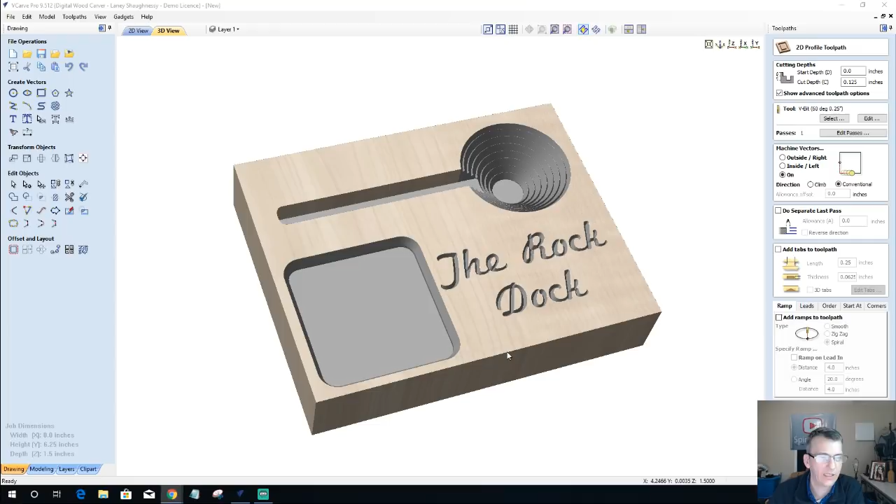So just wanted to give a little screen preview of the basic model. This is the basic model, right? We're gonna dress it up, change it around, make it bigger, do some cool stuff with it. But this will be the basic concept. Our cell phone or tablet, whatever we end up doing, will rest in here, and the speaker of the phone will face the passive speaker here, and the sound will be amplified through this cone, increasing the volume. Depending on the cone's pitch and the carve itself, the ridges in here I think will not hurt the sound quality coming out.

We can make it smooth. We're going to look at that as well, do a couple little step overs on our tool paths and things like that when we get into it. And what it's going to end up being, because I've never made one, I've not carved this yet - this is going to be whatever we end up with at the end of the class, a prototype. I'm going to carve it, test it, see how the sound and everything does, and then build from there.

I'll end up making a few different models of it. Some cell phones have speakers on the left, some on the right, some upside down, whatever the case may be. In my case, my speaker's on the top, so when this is docking, it would either have to sit upside down, or I'm going to create it to where it can sit on its side. So we'll kind of see how that goes.

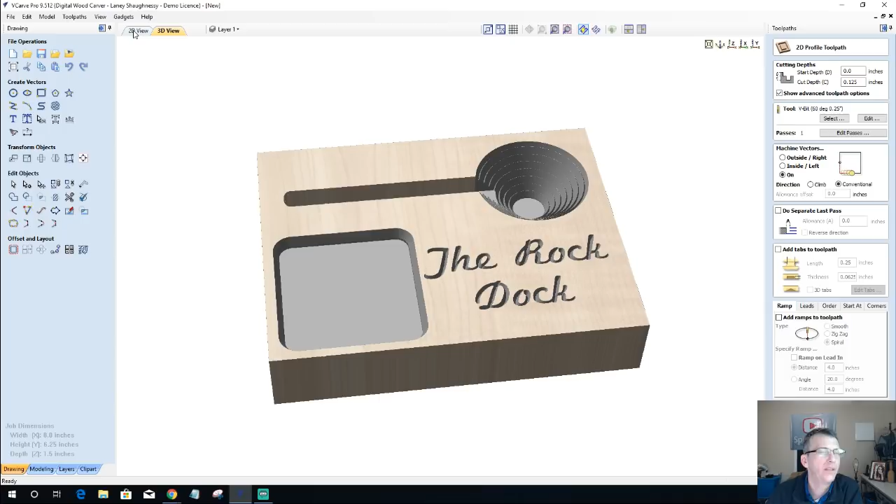We've got a rectangular vector here with some radius corners, and this I thought would be maybe like a little change station or a catch-all for keys for this little dock. Whatever the case may be, we can make it bigger, like a little wallet holder for a men's docking station, or a little jewelry holder for a women's, whatever. This is where your imagination can kind of run wild. So we've got a rectangle for that.

I got some text thrown in there just to fill in the void, but we're going to end up doing something different with that. We've got our slot here, a nice little rectangular slot with an arc at the end, where the phone will sit.

And this arc in this particular rendering is a half inch wide by a half inch deep. The half inch wide will allow my phone to sit in there well enough that it will hold it securely, but it will also give it a little bit of a tilt, so it leans back instead of sitting straight up and down - the phone will tilt back. We could make this wider if we wanted a little more tilt, whatever the case may be.

And then, of course, I have some offset circles that are carved at different depths to create the passive speaker. Now let's take this concept here and...

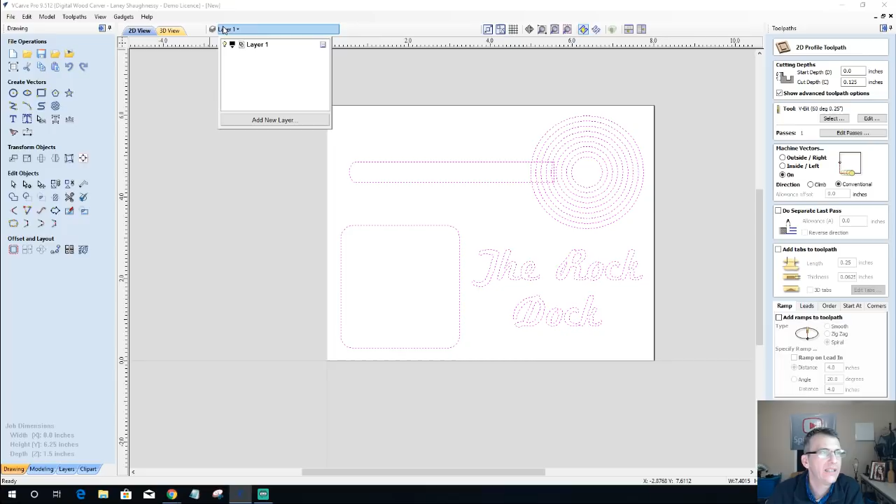We're going to leave that on layer 1, and I'm going to left click up here in layer 1 - or we can access our layers down here in the bottom in our tabs. But I'm going to go up here, it's a little easier.

I'll go back to my drawing tab, and I'm going to right click on layer 1 and rename it. I'll call this the original concept, because right now it's just a concept, a starting point, and then we can collaborate.

I'll ask you guys some questions, what you think. Imagine you were at your desk with your computer screens, keyboard and things in front of you. If this was an accessory sitting on your desk, a little slot maybe for a keyboard, what would you like to see? Maybe a little area for notepads, post-it notes, or a pen or pencil holder, what have you.

We're going to just really create something cool and see what we can come up with from there.

Now one of the things we've got to keep in mind, if we look at the project itself, notice how thick it is here. I've got this at, right now I think it's 1.5 inches. Let's take a look at the job setup. Yeah, 1.5 inches. That would be a little bit too much. For a little docking station, that would be a good height.

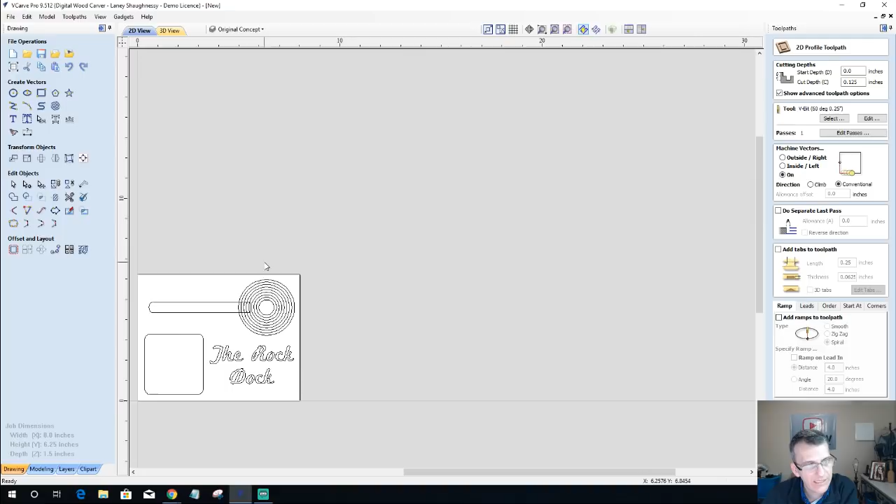For our little tablet station, we're going to end up tapering this board down a little bit so it has a bit of a ramp to it.

What we want to achieve is I'd like to be able to do this in either a 1-inch thick piece of material or 3/4 inch. The only thing I don't know is how well it will work if we try this passive speaker in a 3/4 inch piece of material, will there be enough of a cone or area to amplify the sound?

And that's why it's a concept right now. We're going to change up some things. Are these changes for the positive, or for the bad? Is it going to affect the sound if I'm working with thinner material and don't have enough of a cone for that sound to amplify out of?

All of that we're going to figure out as we go, and then ultimately end up making one of these and doing some tests. Through those tests we'll perfect the design, and when I get that nice sounding quality, when I throw my phone in there and it amplifies the sound ever so slightly, then from there I can apply that to other designs or concepts. I could start to customize it with company logos, or somebody's little league team, whatever the case may be.

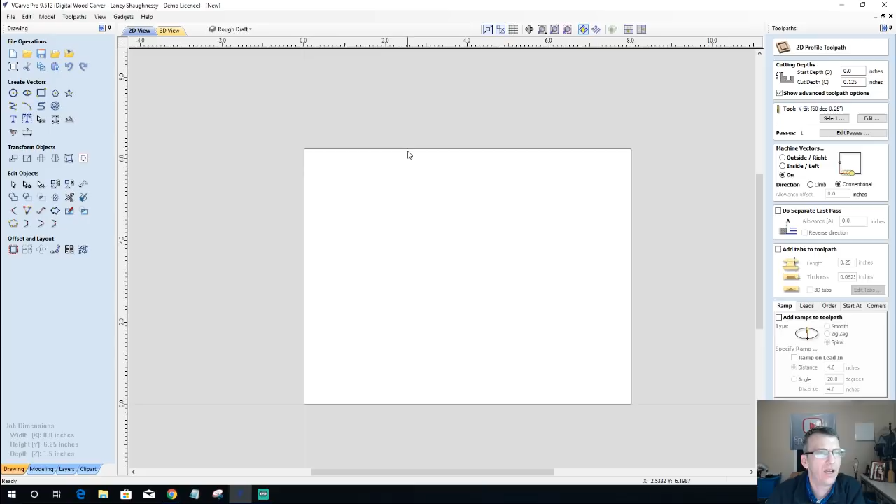Now what I'd like to do with this, for a small docking station, I've got this project - let's start from the beginning here. I've got it about 8 inches long by 6 1/4 inches wide by 1.5 inches thick.

Well, let's change it up, because I'm sitting here at my desk looking at the space, and I've got a mouse pad over to my right, a keyboard, my mouse and things. If I can incorporate some kind of docking station that would hold my mouse pad and all that stuff, that would be pretty cool. But that means my project is going to have to be wider - 8 inches ain't going to cut it. I wish I had a tape measure or some kind of ruler on hand.

Who has a desk without a ruler? What's up with that? If any of you are sitting at a desktop versus a laptop, do me a favor—if you have a tape measure handy, measure your keyboard and throw the measurement up in the chat, and we can modify to that.

For now, I'm going to go under the assumption that I'm working with about a 20-inch wide project, 18 to 20 inches. I think a keyboard isn't that big, but we're gonna go 20 inches and size it down from there. As far as the width, I'm gonna probably go a good...

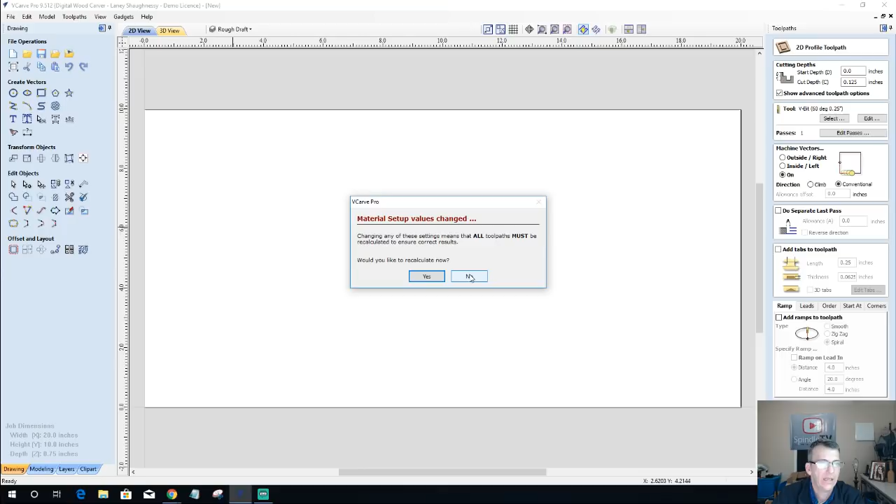This is where we customize things for different setups—we'll find a happy medium and get it in there. So let's get back to that 0.75 and click OK this time instead of cancel. I don't want to calculate those toolpaths I've created; I'm going to get rid of them in just a moment.

But let's look at what I was saying before I went into that little spiel. On my jig I have a wasteboard, and this is going to just be a small segment of the wasteboard. On the position of that wasteboard I have a set of boards positioned in—actually, let me back this one up.

Let me shrink this one up, and let's get these moved over into position so you guys can kind of get the concept.

All right, so I have a jig on my table that has fences on it that my corner of my board references up against, and keeps it square with the table. And then of course I have a series of holes running throughout the project where I have cams that, when positioned and then rotated, cam into the board to push pressure up against the fence.

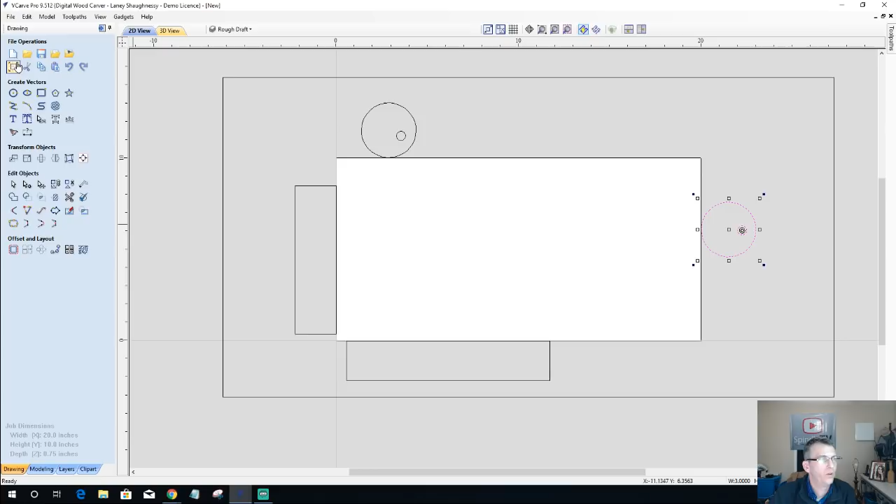So for me, that's why I reference off of my wasteboard in my job setup here, because I have this cam jig that I use. I don't want it ever cutting into it if I was cutting a part out. So by referencing my Z0 position off of the machine bed, or my wasteboard in this sense, I'll never really cut into it, only just graze across the top of it.

And the reason why I work with the XY datum in the bottom left corner is because I zero out my X and Y off of the corner using my DWC Quickset zeroing tool. And so that's why my settings are like this. Your settings may be different. You may be working off the top of the material, starting from the center, whatever the case may be. You're going to set your job up for your needs.

Okay, so let's get rid of this stuff. That was for illustration purposes.

And so Chuck has thrown out a couple of measurements. The big one is an old gaming keyboard with extra buttons on the left and the right, and the other one is just a normal, more common keyboard. So let's go with that more common 17.5 by 5.5 keyboard there. Let's kind of start there.

Let's go with, I'm going to draw a rectangle on the screen using the rectangle tool. And you'll find that if you're new with us, under the Create Vectors menu, we've got our shape tools, and the third icon top row is our draw rectangle tool.

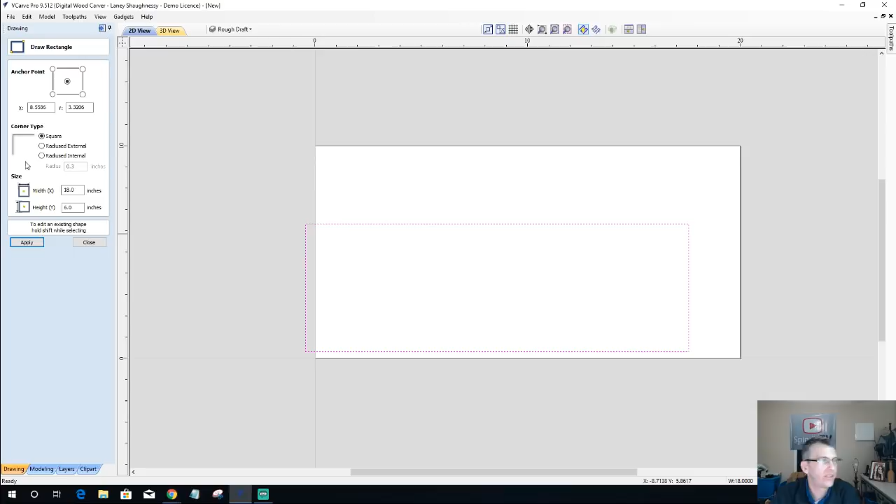And I'm going to go with some radius corners. I'll go with probably about a 0.3 on the radius corners there, just to give it a little bit of a nice corner look — a little more in the 1/4 inch radius, we'll go 0.3, and just to kind of smooth off those sharp corners and stuff.

Now if I double click on my vector that I just drew, it puts it in transform mode. And what transform mode is basically — when we're transforming an object, this is more so for the new guys and girls versus you guys and girls who have been with me each week — the transform objects menu, when we're transforming an object that we've created, we are moving it, sizing it, rotating it, mirror or copying it, distorting it, or aligning it in some way, whether we're aligning it to our material or another object. And in this case, I'm going to align it left and right on my board here.

Now what I'm probably going to end up doing is I'll probably make this a little bigger. I've got a decent sized desk here in front of me, and I've got two curved monitors that I'm looking at here, two curved screens, and I have no idea what their size are — I think they're 21 inches or something like that. But I've got a good little open area on my desk here that I could actually make a nice little caddy and kind of maybe get rid of some of this other miscellaneous junk that's on my desk.

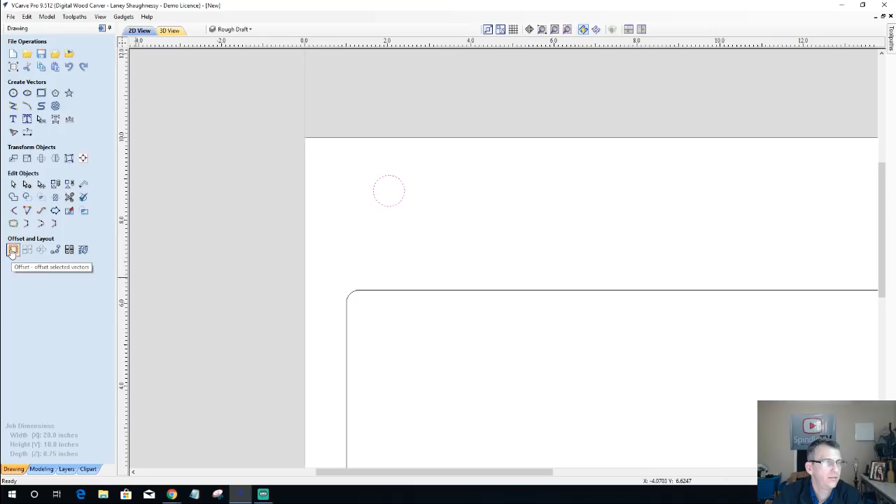So we're going to use the offset tool under offset and layout, it's the first icon, bottom row, and we're going to offset outward. On the spacing, I'm going to be using a 60-degree V-bit, 1/4 inch wide, 60-degree V-bit. I want a kind of narrow cone on the walls and everything.

If I wanted it to be a little bit wider, and again this is where the concept comes in, you know, I'll do some testing. If I did a 90-degree, then my walls would be even more angled. I'm going to start with the 60-degree and see how that goes, but I'm going to be doing some inside profile cuts.

So the spacing of these lines is going to be important. I am going to space them out a 1/16 of an inch. I want to select new, so every time I click offset, it's going to draw the new offset circle and select it, so I can just keep clicking my offset button to get the rings I want.

To create this speaker, I'd like to have it a really good size. Now, how many rings and how much my depth of cut is per ring is going to determine how many rings I need, if I'm not cutting through my material. I want to leave some material down in this pocket cut. Whatever depth I need to cut to get this to ramp up in a nice look will determine how many of these circles I need.

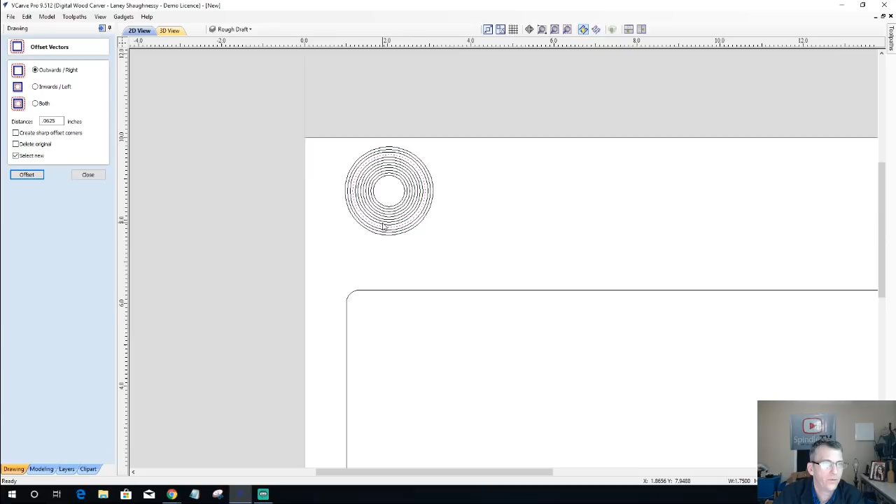So right now, from my original, I've got 1, 2, 3, 4, 5, 6, 7, 8, 9, I believe. Let's do this: 1 through 11. I've got 11, not counting my original, so probably a couple of those I won't need. Let's bring it down to 10, get rid of that last one.

Now, my cell phone is going to sit, because my speaker is on the top of the phone, I could either sit it upside down, but if I do that, my speaker is on the right side of the phone. If I have the screen facing me, then my slot would have to be over here. If this speaker was on the right side, that would be acceptable. I'm going to be turning the phone on its side, and that will put my speaker down in the bottom left corner, which will allow me to put my slot over here.

So I'm going to just draw a rectangle for now. This rectangle is going to be 1/2 inch in height, basically the width of it. And the cell phone slot itself, I'm going to go with 7.5 inches. Now my phone's smaller than that, but this will give me plenty of room to slide things in and all that stuff.

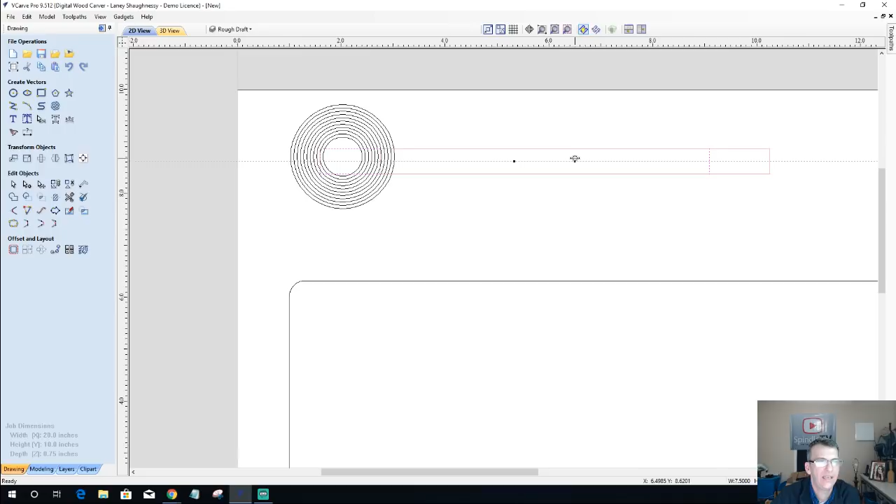And then I'll end up, I think on my tablet, I have like a 10.5 inch tablet, I may want to put a tablet in there. Who knows? You never know what this docking station could turn into.

We could make it a little wider and put our mouse pad over here. So what I want to do now is make sure this rectangle is centered up and down within the center of this circle. We're going to select the rectangle first, then select the circle last, and go into the alignment tools. The last item selected is going to be my selection, and I want that rectangle, the first item, to be centered up and down. So I'll click this third button under the center category and bring it up.

And here at the end, instead of these sharp corners, I'd like to go into node editing, the second icon under edit objects. On this line, this span — a span is a line between two nodes — I'm going to right click and change it from a line to an arc, let it bubble out like that, and that will be my slot.

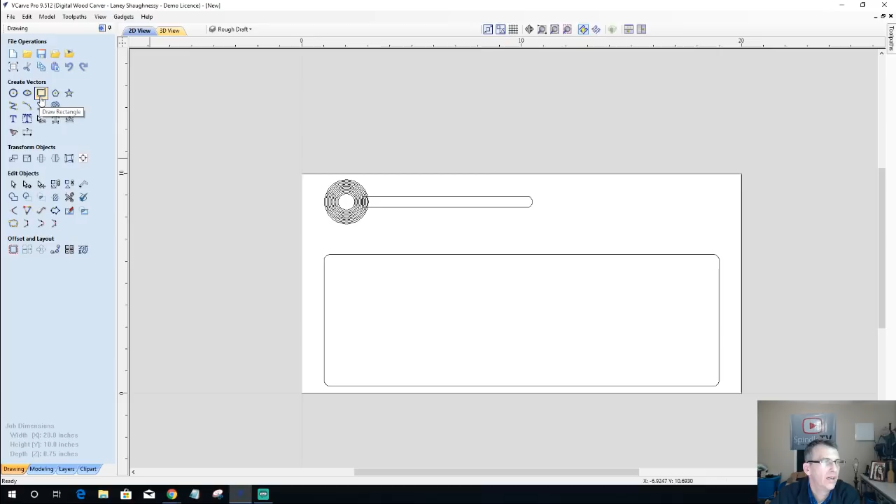Now, on my slot for my phone cord, I could just draw a basic rectangle there to give a little slot for the cord to go out, since it's right at the top of the keyboard. I might not even need it, but I want to give it a little bit of style, so we're going to make that cord kind of S-curve out a little bit.

So let's get rid of that rectangle. Actually, we'll leave the rectangle in there. I'm going to have it go past the line a bit, and go into node editing mode. I'm going to take this span and turn it into a Bezier curve by right clicking on it, and give myself a little curve here.

And then, while I'm in node editing, I'm going to right click on this and delete this span.

Okay, and on the span that's here, I'm going to separate it for a moment because I've got these two little legs right here. If I go back into node editing mode, I've got these two spans at the top and bottom. I'm going to right click on this bottom node and cut the vector there, and on this top corner, right click and cut the vector there too. What that's done is separated this.

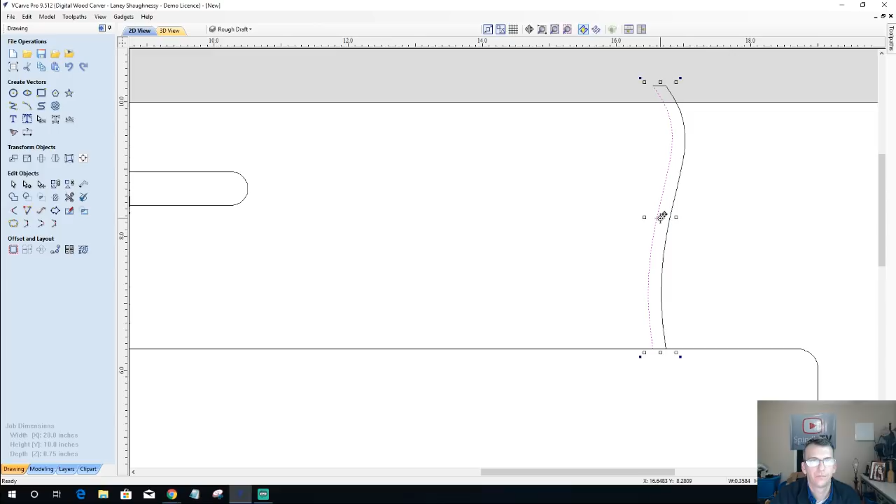My cable coming out of the computer is almost — I'm assuming it's probably about 1/8 of an inch or whatever the case may be. So on this distance here, I'd probably want it to be pretty tight, so when I press it down in there, it follows the path and kind of holds it there.

So let's do this a different way. I'm going to undo, Control Z, or you can use your undo button, to undo that drag, that copy I made. I'm going to right click and copy this, then right click and paste. Now if you use keyboard shortcuts, it's Control C for copy, Control V for paste, but I'm going to use the right click menu, and that's going to paste this line right on top of the line I'm copying.

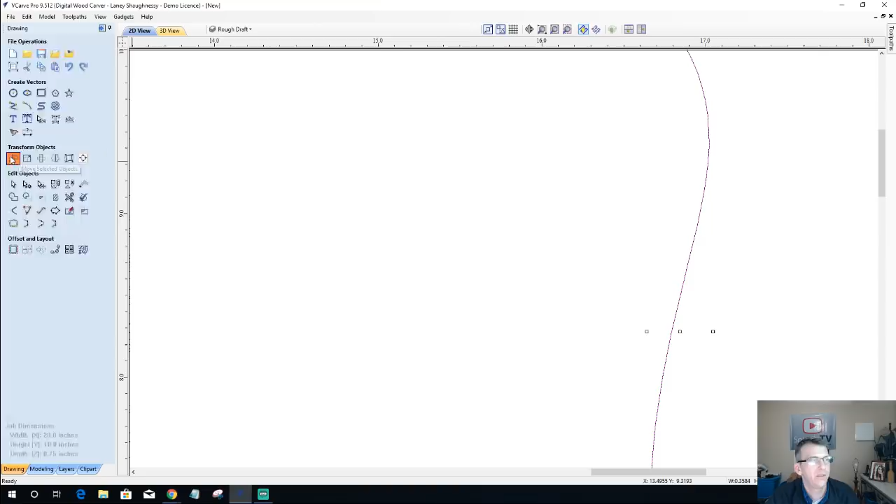And from there I'm going to use my move tool, the first icon under transform objects, and relatively move it along the x-axis a negative 0.125, an eighth of an inch over.

And from there, I'm going to use my scissor tools, making sure that trim vector selections are automatically joined when the form is closed. So I'm going to trim here to close off that end.

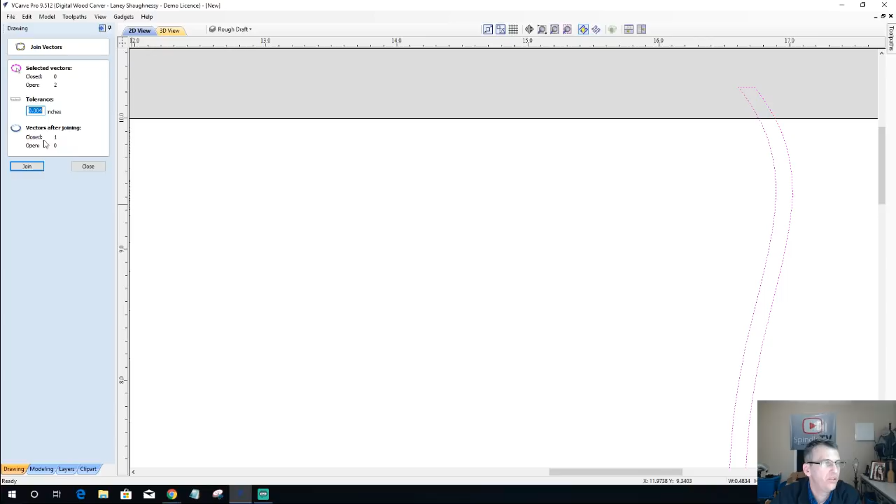And if I sneak down here, my other line is hidden by the line of the keyboard. I'm going to trim that away because it was on top, and that will close off my vector on this front side. Then I'm going to select this back line here and come over to my join tool, the first icon on the last row, and simply take those two vectors I've got and join them into one by clicking the join button.

This is going to be the vector for my pocket cut. Because all of this area within this rectangle is going to be pocketed out, I want to extend this vector a little bit beyond the line, so my router bit doesn't leave a little skin of wood where these two pockets meet. I want to overlap it so I get a nice clean cut. That'll be my little keyboard hole.

All right, so now what else can we put here? Let's put a little miscellaneous pocket here for paper clips, change, whatever the case may be.

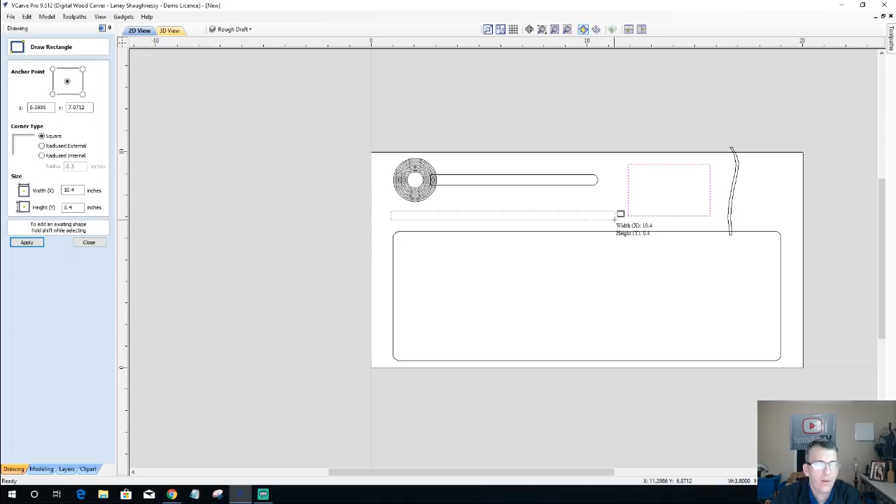And then with that rectangle tool again, I'm going to put in a couple of slots here for maybe a pen holder or pencil, whatever the case may be. Let's do two of them.

How wide is that? Let's look at our size tool and see. It's about a half inch. That's plenty wide, my goodness—pens aren't that fat, I don't think. We'll go with a straight half inch.

Don't want to get too close to my speaker now, so a single pen slot is fine. I'm not in school, I don't have pens and crayons and markers and all that, so a single pen slot will be fine. There, I'll probably end up with this one.

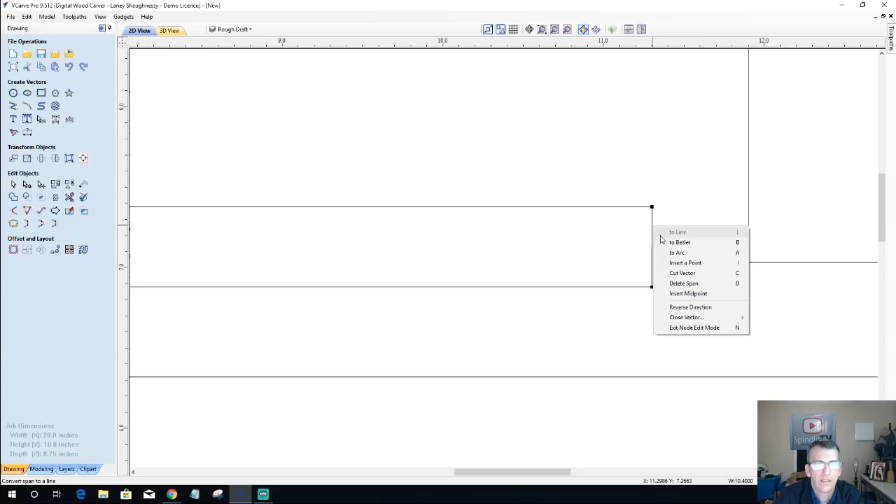Let's round off the ends. I'm going to go with node editing, and on this span here I'll put my mouse right on the line, right click, and change it to an arc. Same thing on this end—right click and change that to an arc.

Alright, now that I have that, let's get out of node editing by going back into our selection mode and shorten this up a little bit.

Clean that up. Alright, on this here I'm going to be doing a V-carve kind of angled walls. This pocket here, I'll most likely use a core box bit of sorts, so I have a nice little rounded bottom instead of a flat. This one will be just an end mill, cutting it out.

But because I want nice little organic shapes and smooth stuff, I'm gonna go back into my rectangle tool here, and give myself a little radius on those corners where that pocket's going to be.

All right, let's see here—Jeff threw out, put a hole through the board and put your slot on the underside. So Jeff, with the way my keyboard is configured, the wires at the top—Jeff is saying you can bend your wire down, put the slot on the bottom side, so it comes out of the bottom, and that way you don't have this slot cutting through the top, giving you more space over here to do something else with it.

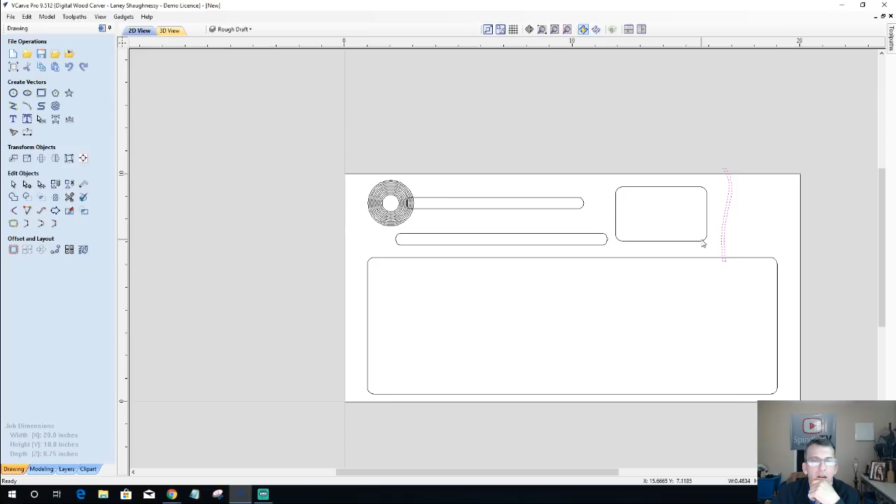With that then, I'm going to do that—then that gives me the opportunity to line up to that. Now if you notice what I just did, what did I just do? As I was moving, I wanted this rectangle to be in line with this one. So keeping my left mouse button held down as I'm dragging this out, I can wake up this vector, but just hover right over this, and it gives me this guideline here and allows me to snap my object to that guideline, ensuring that both of them are lined up.

Okay, so excellent. Now I'm going to leave this vector here for a minute. We'll most likely move it to the other side—I'll end up doing a couple things there, but we'll just leave this here for visualization.

But what we do need to do is, if that cable is going to come out of the keyboard, there's going to be a 90-degree bend somewhere going down. So let's go ahead and get a circle. I don't want it too close to the keyboard.

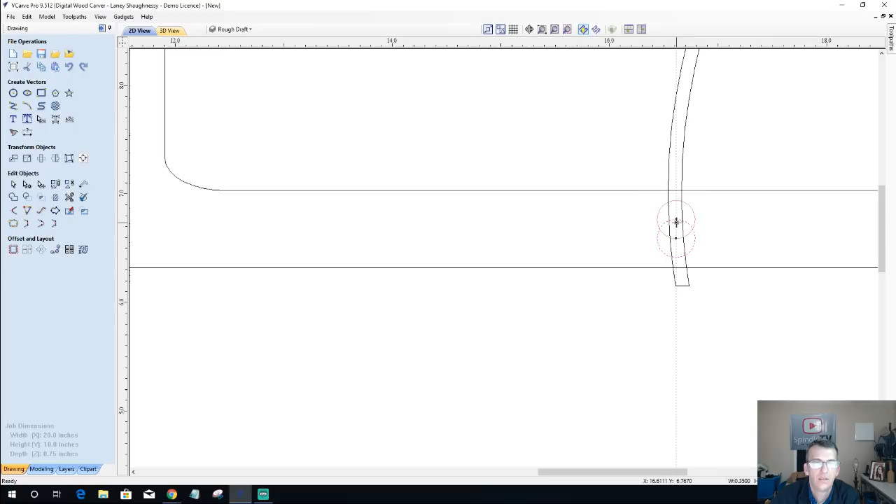I need flexibility of the cables, so it'll go right about here, since the cable comes right out of the top of my keyboard. We're going to make the size of this just a little over, because it's about an eighth of an inch. Let me get my circle tool and hold shift down to select that circle again so I can edit it. I don't want it to be a tight fit, and also I've got a USB slot at the end.

I've got a USB that plugs in at the end, so that means I'm going to have to cut a square slot in there for the USB to fit through, because I'm not cutting that end off the keyboard just to get it down in that hole. It's kind of throwing a little wrench in the plan. This isn't a wireless keyboard, so let's think about that for a moment.

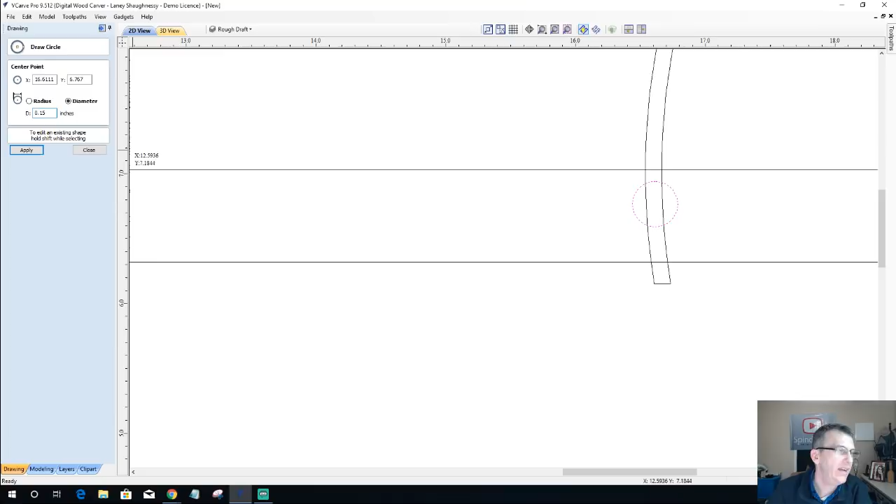If I do this and everything, I'll go 0.15 on the diameter of the hole, and then I'm going to have to get my USB plug-in in there, so I'll have to measure that. And I'll have to cut that little square in there, which won't be too bad. It wouldn't look too bad. We'll see — I may still go with the original concept of running across the top.

But let's center these two objects up to one another using the alignment tool and center. Under align to selection, I'm aligning them to one another. Whatever object I select first is what I want to align; whatever object I select last is what I want to align to. Then I click the center button.

Now I'm going to take both of these and select this shape last, and I should be able to— oh no, it's an S curve, so that's not going to work. So I'm just going to turn this vector off, use my left arrow key, and kind of eyeball it. Right about there. All right, so I have a little square with a circle in there.

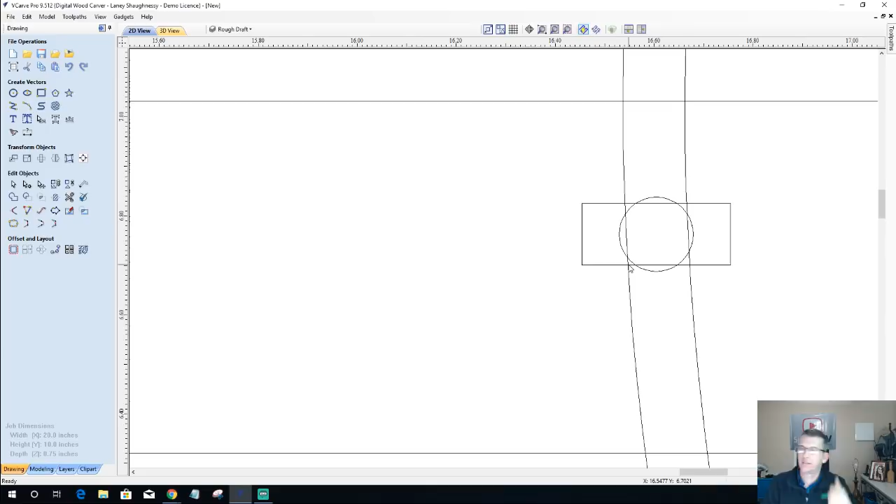Excellent. Man, I got a cramp in my arm. I'm not sure why — all this typing. All right, so I'll have to measure the little plug-in at the end of my keyboard and see where it goes from there.

But I use the full range of my mouse when moving around, and my mouse pad is big, so I wouldn't want to incorporate that into this too much, because this is going to be the desktop accessory versus the original concept, which is a little charging docking station for nightstands, dressers, whatever the case may be, you know what I mean. So this is just version number two.

All right, so with that, let's think about a couple of things. One is, do I want to have this taper down a bit? If I do, I'm going to have to figure out how to machine that to taper it down. If this were Aspire, I could just draw the model of that component and that angle, but I'm working in Pro, so I have to work around that.

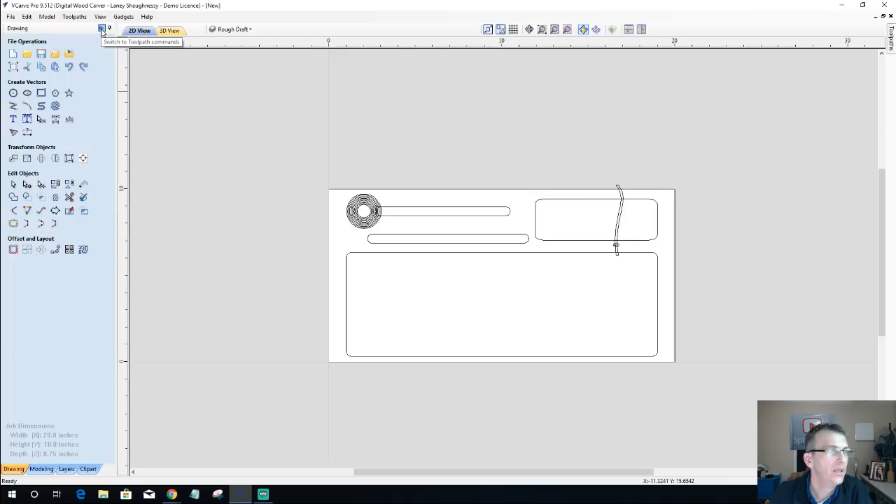For right now, let's go ahead and just create our toolpaths and see where we are and what we're looking like. So we're going to switch out of the drawing side for a moment over to the toolpath side. Now, these toolpaths here were for that original concept part. I don't want them to confuse you, so what I'm going to do is select all of them and delete them — get rid of them, because we're going to start from here.

I could have just kept adding and adding to this list, but then you'd be like, okay, which toolpath was what? I'll end up recreating them in a smaller project. I've changed my board size and all, so it's going to be a completely different project.

All right, so what do we got here? We got some pocket cuts and things. Let's start with this pocket here. I know what I want it to be. I want this pocket, I'll use the pocket toolpath, a 1/2 inch wide. I'm going to go 0.4 inches deep, and I'm going to be using a 1/8 inch end mill to cut that pocket. I could use a 1/4 inch since it's a 1/2 inch wide. Let's do that for machining purposes and time. We'll use a 1/4 inch router bit, and with it selected, we'll calculate that toolpath and get that pocket cut.

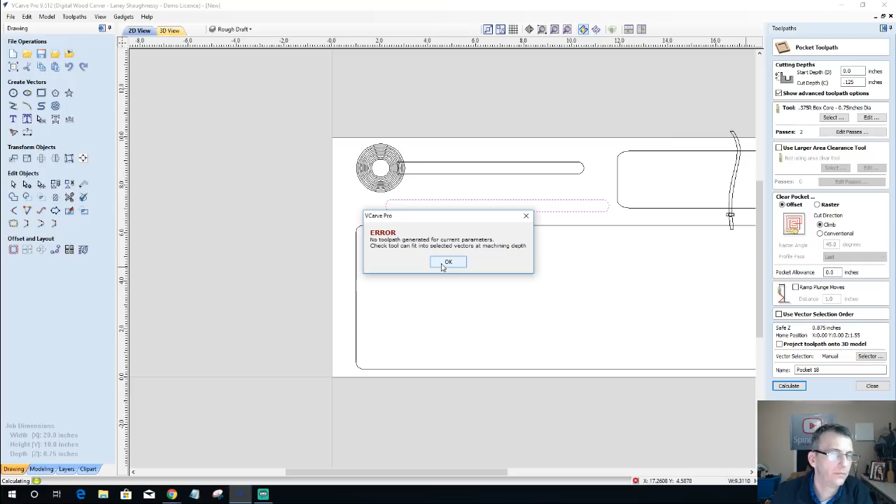Oh, actually, I'm an idiot. I don't need a pocket cut. Who's the goofball there, guys and girls? Laney is. I am going to draw a line from here to here across the center of this. It's a box core bit, so I'm just going to use that line and do a profile toolpath 1/8 of an inch deep with my round box core bit.

Okay. I want to be on the line. I want it to cut right on that line and everything. So let's go ahead and calculate that toolpath. Okay, that'll be my little pen holder area.

All right, now over here, there's going to be 2 toolpaths for this. One is a pocket, and the other is going to be a profile. Let's start with that first. And I do have this extended over, thinking that I am going to go underneath and bring the cable out the bottom side. If I was doing it off the top side the way we originally had it, I would not have the cable running through this thing. I would shorten this area up to some kind of little catch-all. But we'll make that wider, and we're going to use this, and then we'll figure out this part in a moment.

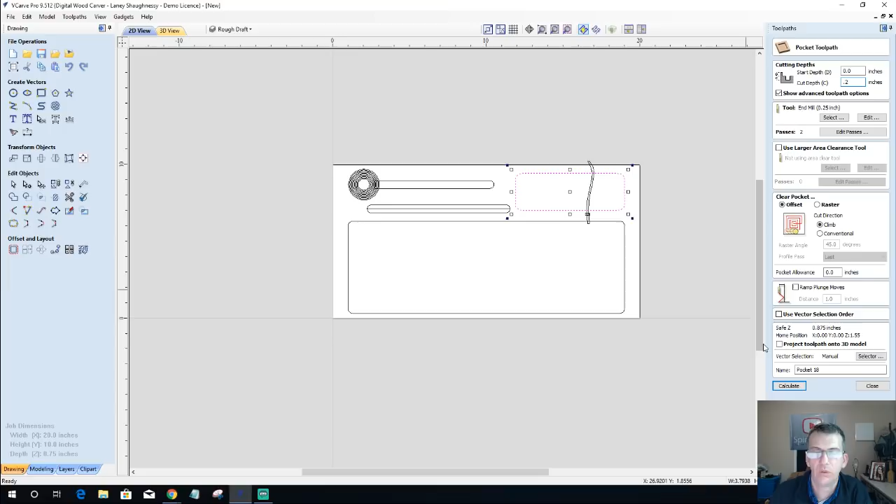So that's going to be a pocket cut there. And for this pocket, I'm going to only go about 0.2. Yeah, 0.2 is good. And I'm going to use a 1/4 inch end mill, and calculate that to pocket out that area.

And with that, instead of these walls being straight up and down, I want a nice angle to them, a nice transitional angle. But what I want to make sure of is that this pen slot isn't too close. So what I'm actually going to do is open up this profile toolpath for the pen slot, reopen it, and take this pen slot here, and just shift it over a bit. There we go. I'm just going to recalculate, turn off this outer diameter, recalculate this one, move it over a little bit. So let's get back to our preview there.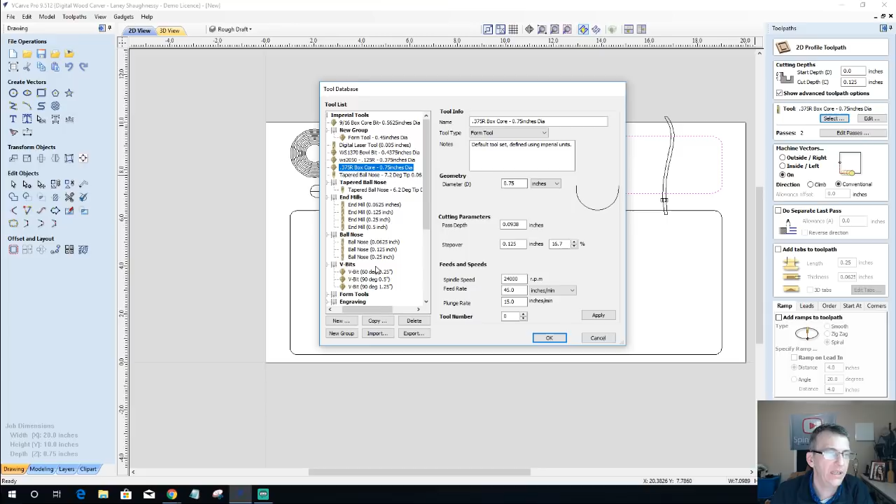Now for that nice little transition or angled walls, what I'm going to do is a profile toolpath on this vector, using my 60-degree V-bit. Most of you got a 60-degree V-bit with your machine. We're going to cut on the line, machining on the line, and go to the depth of 0.2, the same as the pocket. So we'll calculate this and get that nice 60-degree angle. If you want more of a slope, use a 90, 120, whatever the case may be. I just want a nice little pocket area with angled walls.

All right, so coming along. Now we're getting the basic stuff out of the way before we get into the speaker. For the keyboard, this is going to be a pocket. Right now I'm doing everything under the assumption that this board's going to be flat. Instead of milling an angle into this, I think I'll just put some rubber feet on the bottom side, since I'll be working on the bottom for the cable anyway, to give it a raised feel. But we'll also look at milling it if we wanted to thin things out towards the front, because I don't know if I want the keyboard sitting down in this too far. So we'll see.

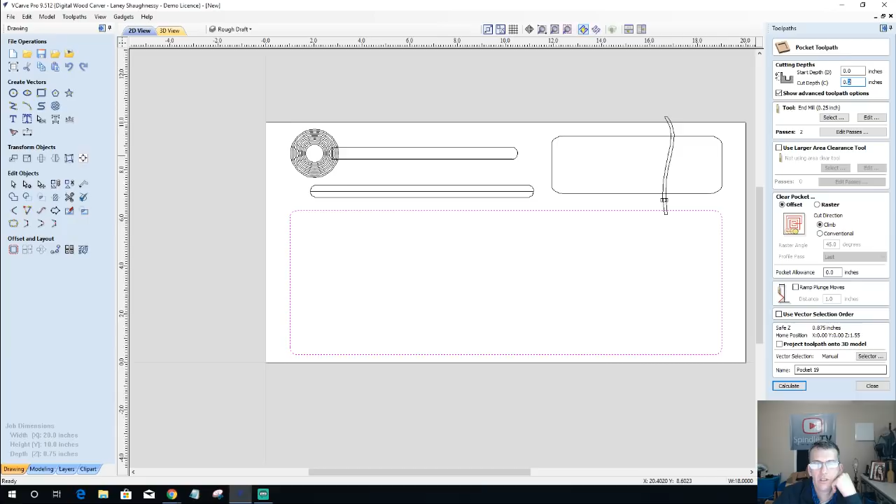Let's go ahead, this is going to be a pocket cut. My keyboard is thicker than 1/4 of an inch for sure. So all I want is just a nice little resting area in there, so I don't need to go too deep. I'll probably stick with the 0.2 depth with that 1/4 inch end mill, and we'll calculate that out.

Now Bob threw in a comment, says use a box core bit instead of a V-bit. So Bob is saying on the outer rim here, let's preview this before we move on to that.

The reason why the previews are taking long is I'm set up to maximum view on the simulation quality. I'll probably end up turning that down in just a second.

Okay, so now Bob is saying instead of using a V-bit, use the box core bit on the walls here to give a little bit of a roundness to that. Box core bit, bowl cutting bit, things like that. But let's take a look at what this toolpath would look like with the box core bit here on the edge instead of the V-bit.

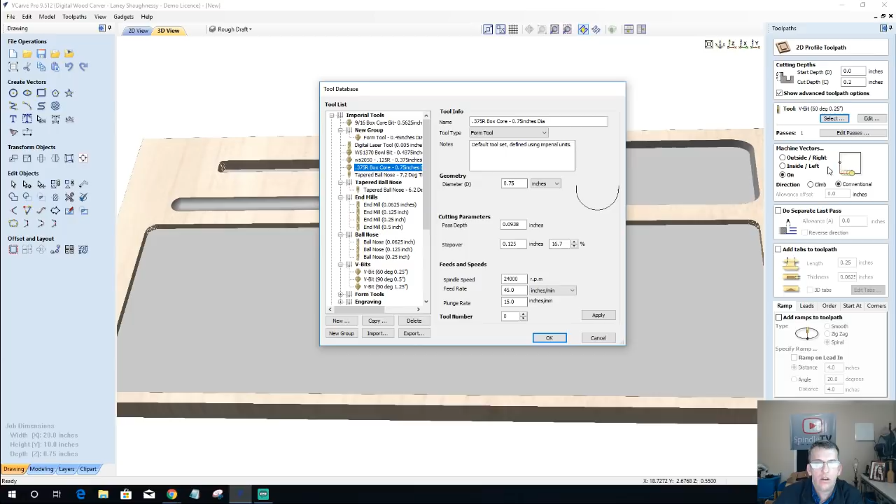Let's go back into that pocket cut, and we'll change up to a box core bit on that profile cut. Now if I'm cutting on the line, that means half my bit is cutting on the line, half is inside the pocket. So what that's going to do is give me this radius. My little caddy, instead of that 60-degree angle, is going to have a slight curvature to it. So I'll stay with machining on the line for that, and we'll calculate that out.

Let me turn my preview simulation quality down a little bit, and let's calculate this toolpath and preview all of them one more time, and see what that change to a box core bit does for us. Very nice, very nice.

Excellent suggestion, Bob. I like it a lot. I don't know if I'd do that with the keyboard pocket though, I think I'd leave the keyboard pocket like it is. But that is a really nice look, and keep that in mind guys. So for like a little change caddy for a wallet, or a jewelry and purse caddy, that's actually not too bad of a look there for a nice little shallow piece. Good job, Bob.

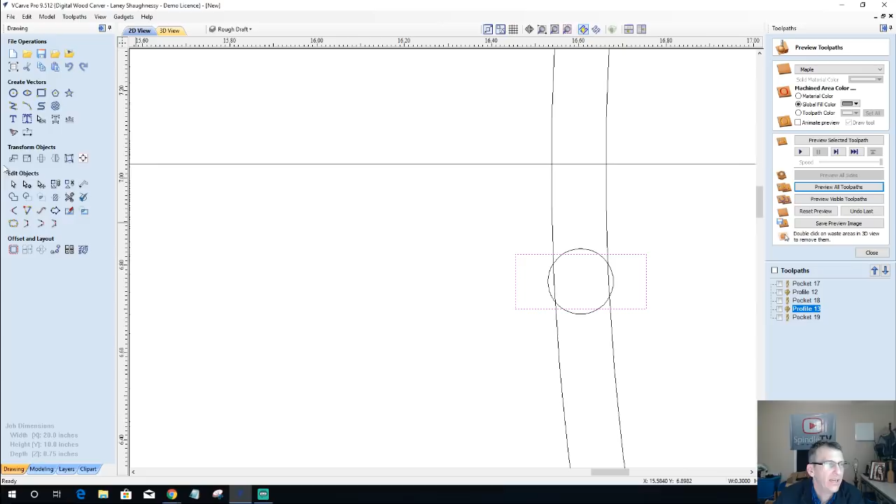Thank you. All right, now let's focus on this for a minute before we get into the speaker. The speaker is going to take a moment. So let's look at what I've got here for this rectangle for the size. I've got it about 0.3 inches wide.

1/8 inch thick, I don't have a tape measure or set of calipers to know for sure. I don't want this hole too big, but I want it big enough that a USB plug could slip through it, this rectangular cutout that's here. Let's give it just a little bit more.

And on the width, let's be a little generous. We'll go 9/16. And that'll be fine. Now this particular pocket is going to be cut all the way through, so rather than pocketing it, we're going to profile cut it all the way through. And then our groove on the other side, we'll end up changing this project from a single-sided project to a two-sided project here in a second. So Joe threw out 0.600 by 0.400.

All right, there we go. And you think that'll give me a comfortable slip through. So we got to go 0.6. Let's give a little bit of leeway. So let's go 0.625. Give a little bit of leeway.

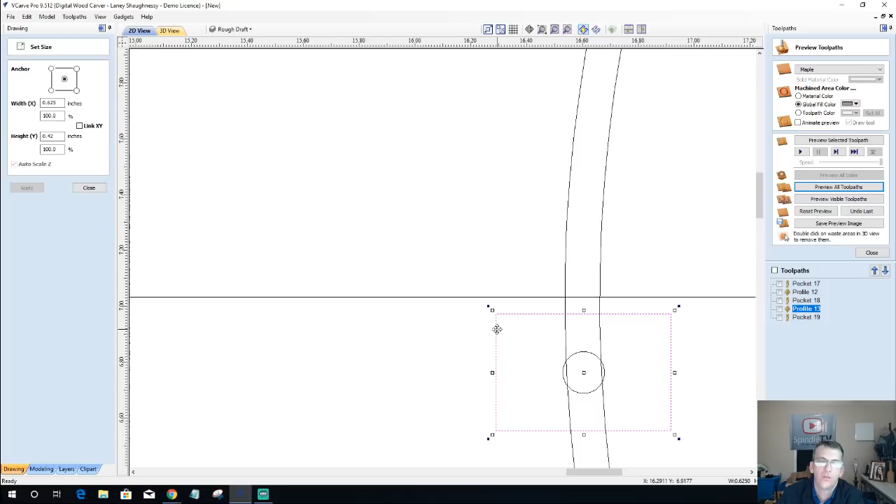Let's go ahead... if we were working in Aspire, Bob, that would be the great way to go. We're working in VCarve Pro. Bob's suggestion is create the keyboard pocket as a component and use the tilt and fade and everything. It's a phenomenal idea if we were using Aspire. We're working in Pro. We're making this versatile so desktop Pro and Aspire users can use it. But excellent idea.

We'll go ahead and leave that as is for the moment. Let's go ahead and profile cut this out. I'm going to be on the inside of this. I'll go ahead and use a 1/4 inch end mill and calculate. Oh, it would help if I gave myself the proper depth of cut. And so what that did, let's go 0.75.

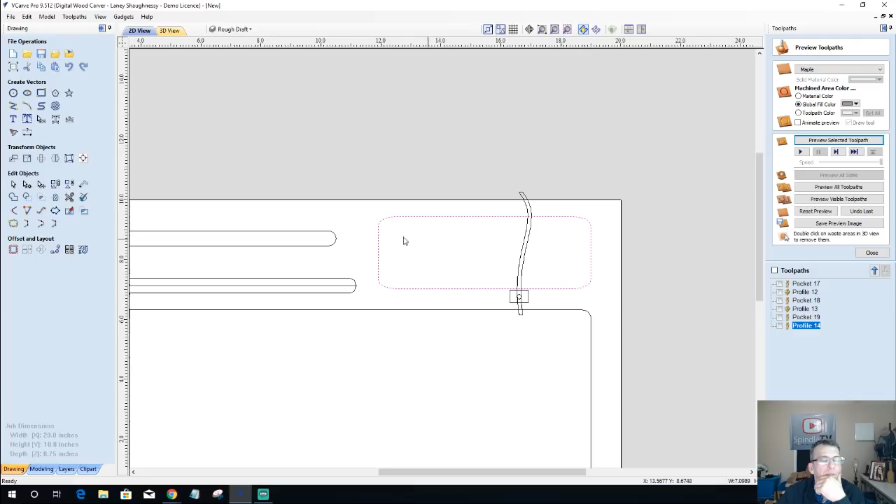So that comes into my box core is brought my caddy out a little bit. So what I'm going to do, because of the box core bit and everything, and how close I am here and stuff, it's actually... tell you what, we'll do this. We'll bring this up a little bit.

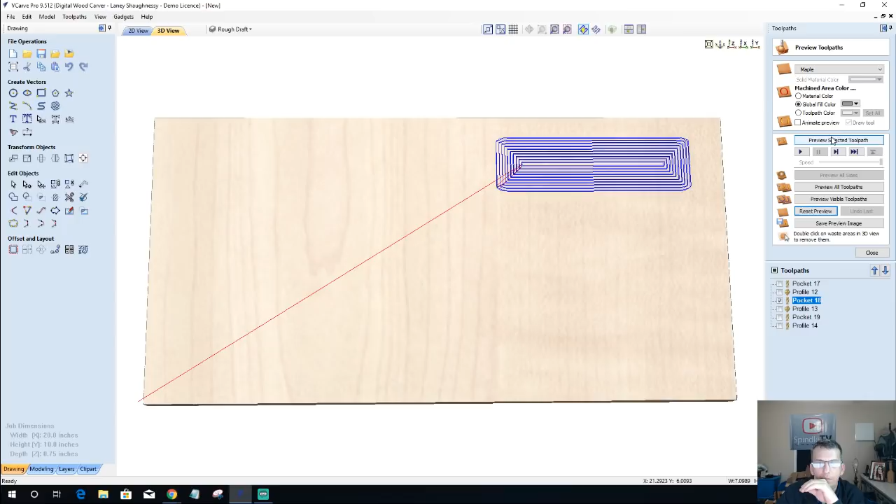I changed my... well, that was stupid on my part. I changed my caddy size just a little bit. And I don't know if I would mind the USB hole cutting into it, just not as much as it was.

And that's fine. All right, now with that, I've got this cable here that's going to go down into this hole and everything, so I still need to kind of pocket this area out here. So let's go ahead and take a line tool, and I'll just draw a line here for a moment.

Now before I start trimming this away and everything, I'm going to take and copy this to another layer, because I'm going to end up moving it to the other side. It's not a two-sided project yet, so I can't copy it to the other side just yet, but I can copy it to a new layer. And I'll call this my cable track.

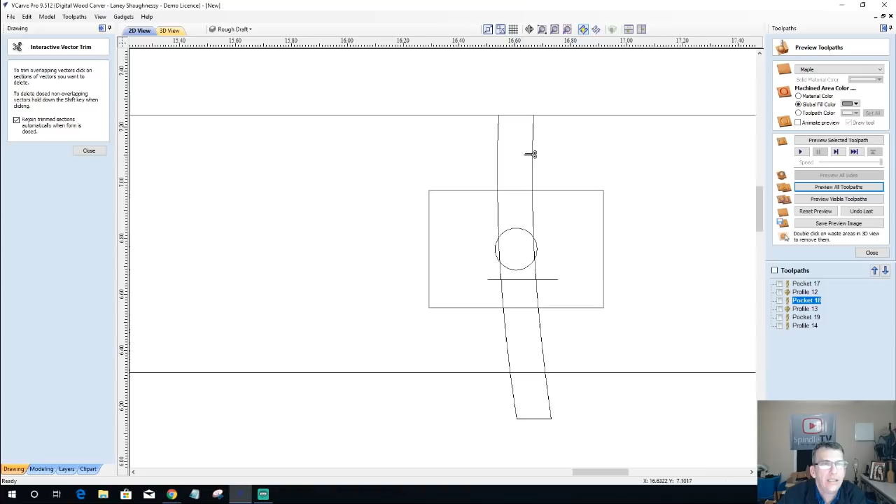I'm going to turn that off for a moment, because I'm going to end up taking and cleaning this up here, so that I have my vector for my small little pocket cut. And I got to use an 1/8 inch end mill with this one, because it's only an 1/8 inch wide, or so I'll use an 1/8 inch end mill.

And I'm going to go... have that bend down. What was my depth of cut? Let's go a little deeper. I think 0.2, wasn't I at? There we go. All right, which will be fine.

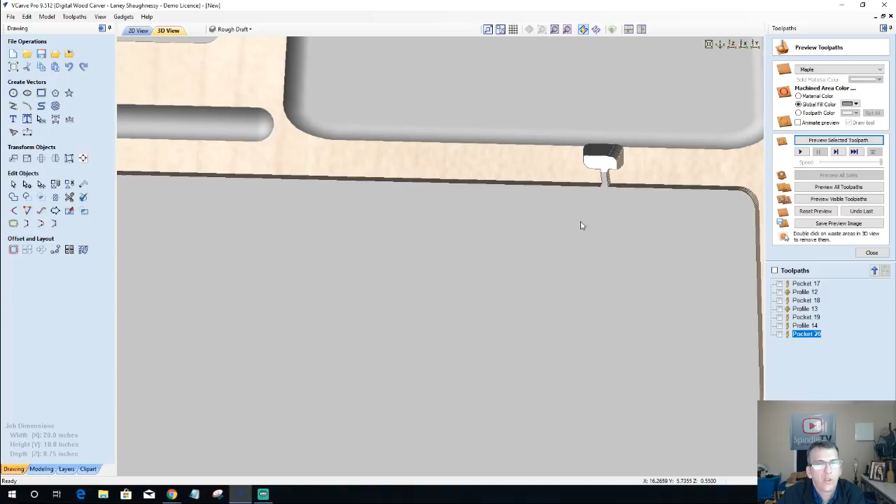We'll end up... again, this is a concept, test cut, see what fits, what looks good, what doesn't, but the keyboard's actually going to be sitting here. The cable's coming out of the top, so this little slot here is probably not even needed. Most likely it's not even needed, because the cable's coming out of the top and it's bending down. So let's get rid of that.

All right, now let's focus on changing this to a two-sided project. Let's focus on our speaker and see what we come up with. First thing I'm going to do, since I've committed to a two-sided project, is change this setup here. I'll be touching off on the machine bed on both sides because of my jig, still working off the bottom left corner, and I'll be flipping it along the y-axis.

So it's recalculating my toolpath for me. Now I can come in here and get rid of this vector. Let me turn my cable track vector back on and move it to the other side. I don't need this vector here anymore, so I can delete it and move it over. I can still faintly see it - it just shows me where that outline is. I don't necessarily need it to run all the way to the keyboard.

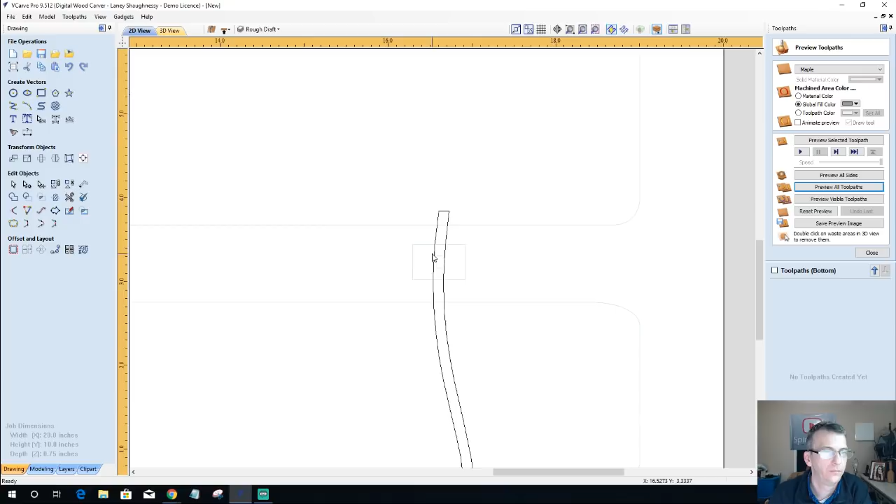So I'll flip over to the other side for a moment and shorten this up, since I only needed it to go into that hole. This will be a pocket cut - while I'm here, might as well do it. It'll be a pocket cut, and I'm going to go 0.2 with that.

Using a 1/8 inch end mill, calculate that toolpath. What happened there? Okay, my 1/8 inch bit can't fit in some of these areas. So let's widen it up a bit - give me a second. There we go.

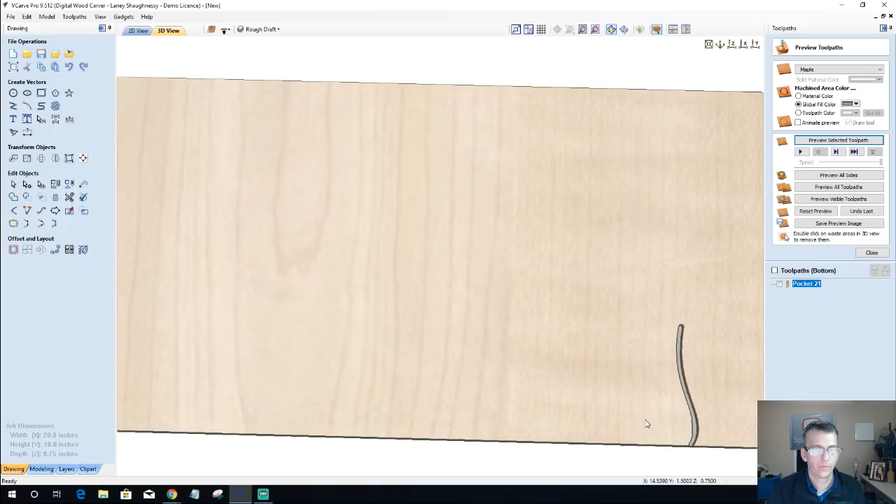Okay, so I want a nice clean exit out of here. I don't want any rounded edges. Sorry about the jumping around there, I want to zoom into this. All right, so that'll be fine. Let's get this in 3D view here and preview all sides, see where we're at so far.

Let's see here - so Joe suggests throwing in a 0.06 radius on the corners. Yep, I could do that, Joe. He's talking about for the USB slot. I'm going to let the router bit radius it, but yes, we can put that in.

Bob throws back that he understands it being just a versatile project, but yes Bob, it was a great idea. Now Bob asks: can the cord come out from under the keyboard? No, well, it depends on the keyboard itself, Bob. On my particular keyboard - if you can see my little screen in the bottom right corner there - my cable is a corded cable that comes out of the top of the keyboard. So basically it's going to come out a little bit and bend down, go through that, then through that 3/4 of an inch, and race out to the back, versus coming down underneath the keyboard without putting too much stress or bending on that cable.

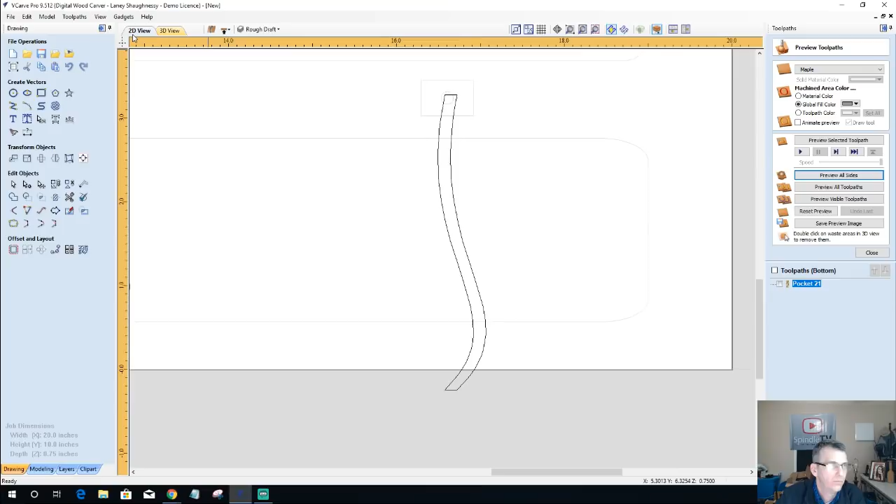So we could go into node editing mode - that's why we're collaborating. Cut the vector - actually, let's not cut the vector, let's delete the span instead. We'll delete this one too since I cut it. I'll delete this span here, and down here, so I end up with a single line.

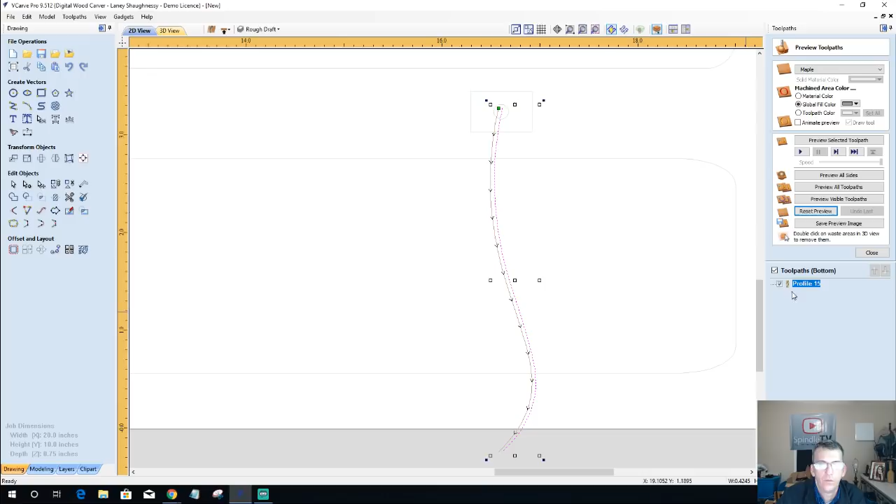And for our toolpath, we will delete this and go into a profile toolpath. Still going to cut the same depth, I'm going to use a 1/8 inch end mill on the line, calculate, and let's reset this preview. Actually, let me change one thing before I do that - move it over a little bit. All right, recalculate that and preview all the toolpaths. There we go - preview all sides.

Okay, so far so good. Let's get our speaker done. That's the main attraction today, passive speaker. So let's get our speaker done here.

All right, I'm going to start from the outside and work my way in. I'll use a V-bit for this since I want some angled walls and stuff. But I need to see what my depth is.

My maximum pocket depth here, this is a 3/4 inch board, and I do not want to cut all the way through it. So I'm going to limit this to 5/8 of an inch, which leaves a little 1/8 inch material, plenty. That's going to be my final cut, and it's progressively going to come up.

It's progressively going to come up until everything is done. So let's go with a profile toolpath, and we're going to set the depth of cut for this first pass.

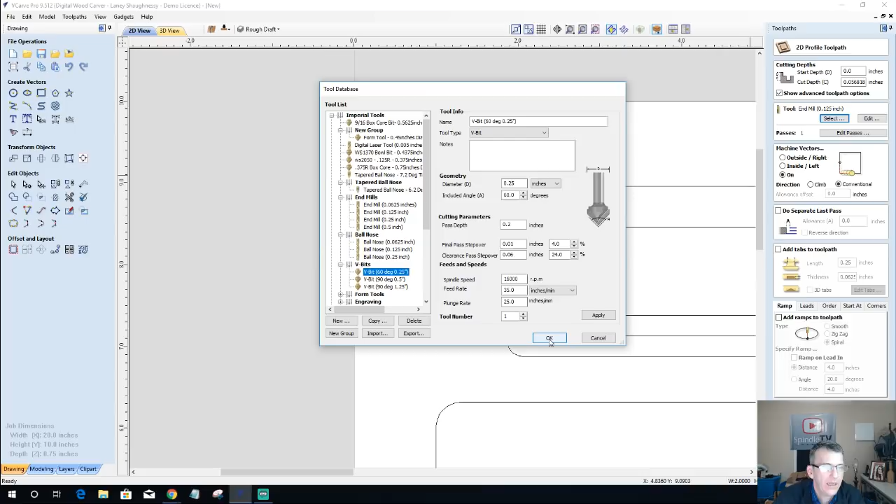I probably could eliminate some of these lines and do less, but I like a smooth cut, so I'll leave them there. We'll keep this value, just copy it to have it there, and calculate this toolpath.

Let's flip back over to the front side here, and let's split the screen so you guys can see, and let's focus on both of these so we're kind of working together.

All right, with that toolpath done, I'm going to continue on. Profile toolpath, grab the next one. On my value, which is still in here, I'm just going to multiply that by 2 and calculate.

This third one, profile toolpath. I could just add the cut in there, but what I'm going to do is paste the value, my cut value, and continue multiplying by 3.

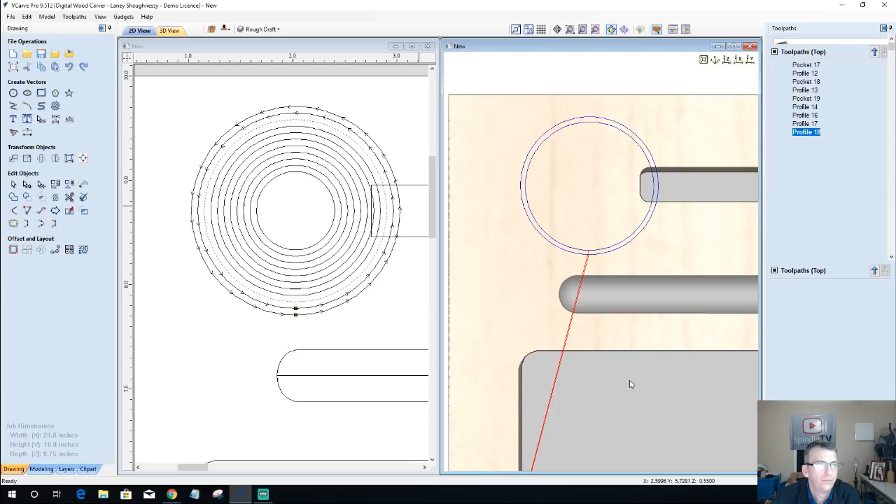There's probably a different way you guys would approach that - however you want to approach it, that's fine, this is kind of my method here. I'm going to paste that value in and multiply it by 4.

And calculate. Now let's take a look at what we're doing. Let's go ahead and preview these 4 toolpaths now so we can see the cut and make sure we're actually doing it right, that we'll get the result we want.

Let me tilt this a little bit - a little bit of an optical illusion there. So we're going down progressively. We've got the center still to work out, so let's continue on.

Let's grab our next ring here. I'm going to paste that value and multiply it by 5 and calculate. Oops, that was stupid, hold on a minute. Times 5, hit that equal sign, get that value in there, calculate that toolpath.

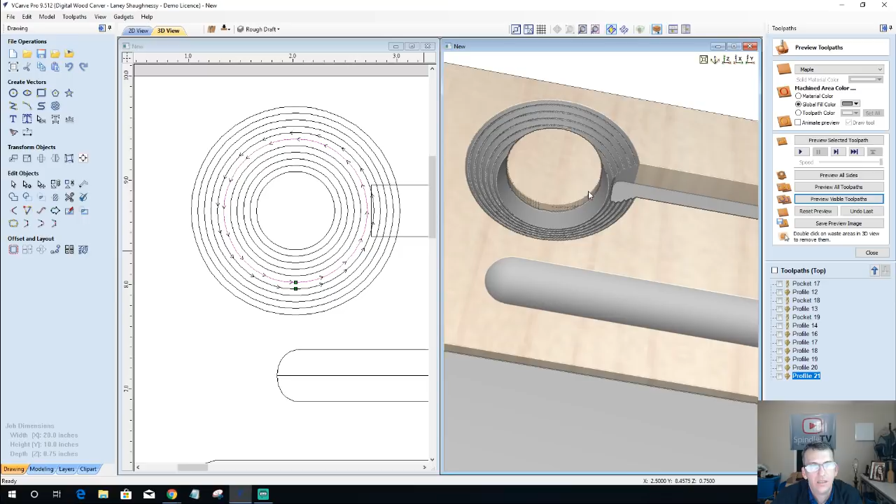Right about here is where I want to stop. I want to go ahead and pocket this down because I don't want my bit... actually I need to come back a little bit more. Right now my V-bit is cutting in here, but its shank is most likely hitting on this inner edge. So I need to get rid of this meat in the middle, and I may do that pocket cut first.

I'm going to do a pocket cut here to my full depth of 0.625 with my quarter inch end mill, and get rid of that meat that's in there.

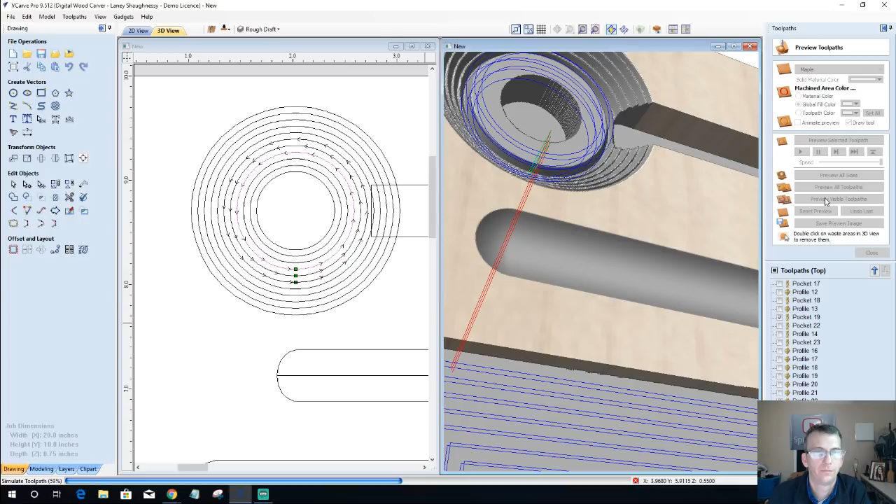Okay, once again we're getting into, you can see on this ridge here, this straight meat right here where the V cut comes into there, that straight area is where my shank of my bit, I only have a 0.2 depth of cut, maximum depth of cut on that flute. On the left side I'm fine, but on that right side or whatever side of the bit it is, I've exceeded my depth of cut, so my shank is colliding with this part here. So we need to mill that down.

I'm pretty safe to take this that I've got. I can actually step back one, and I'm going to make one more pocket cut, cutting down 0.375 with my quarter inch end mill. And that pocket cut, and all these are out of order right now. We're going to move them up where they belong, and then you'll see everything come together.

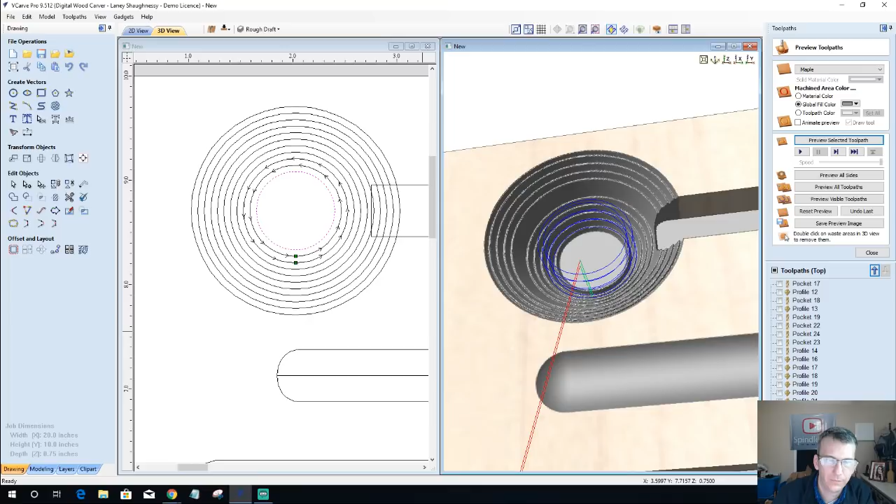I'm hoping... and I missed a line. You can see how wide that gap is. I missed a line somewhere. No, it shows there. Let me preview that toolpath.

Preview. Maybe my depth value is wrong on there, but that's fine. Gives me an authentic speaker look.

All right, so now let's look and see what comments we've got. Steve Brenneman retracted his message. Okay, Steve, if you got another one, throw it out there.

So this is this step down. I'll come back and look at my past steps on this one in a moment. But I have this little step over, step down, step over, step down. It's kind of that speakered look.

I want that for the simple fact that I think that's going to do something with the reverb or the volume. I don't know, this is a concept, right? This is a thought, because if you've ever seen the inside of a speaker cone, they've got those little ribs and rings. There's a reason for that. There's something in that design.

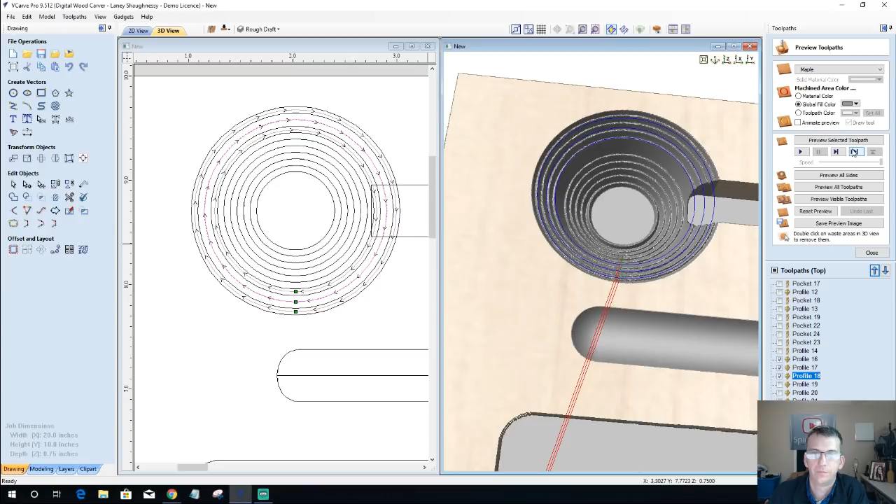So if I go inside the line for this cut, and inside the line for this second cut, and inside the line for this third cut... let me reset the preview. And which one's that was? I think that was one, two, and three. Preview, visible toolpath.

Okay, so if I go inside the line, I'm stepping over even more so than before. And it's because of the simple fact of the spacing of my lines. So remind me to change them. Let me do it now before I forget. I want to be on the line with these.

Let me change them and let me show you how to get the smooth effect. Calculate that one. On the line, calculate that. And this is also, if you ever needed to do a chamfer, like a 45-degree cut at the end of a board or what have you, I'll show you. Calculate on the line. Calculate that. Well, let me get back where I was.

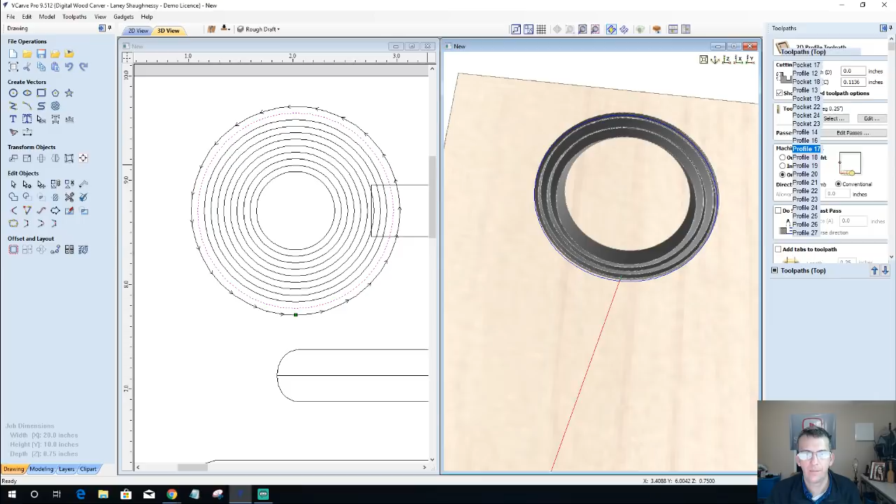All right, let's reset this preview. Let's go back over to our 2D view here for a moment, and let me see if I can illustrate this for you. Let me take a rectangle tool, and we're going to be looking at a side view.

Okay, and let's say that my maximum depth of cut is 0.625. And the width, from the end of my cut, which would basically be the center to the outside edge - if I look at my size, my diameter, my outside diameter, 2 inches. Okay, so 1 inch is the radius. Let me go back where I was.

Go back into my rectangle tool. Hold your shift key down when you want to edit a vector that you've already drawn. So on my height of this rectangle here from a side view, if I go 0.625, and then the width, you know, the radius is going to be 1 inch. Let's go 1 inch.

I'm using a 60-degree V-bit. If I want this to be a nice smooth cut, then a 90 would be an even better bit, but I want kind of a deep angle cut and things. So let me draw a line, snap to this corner here, and 60 degrees.

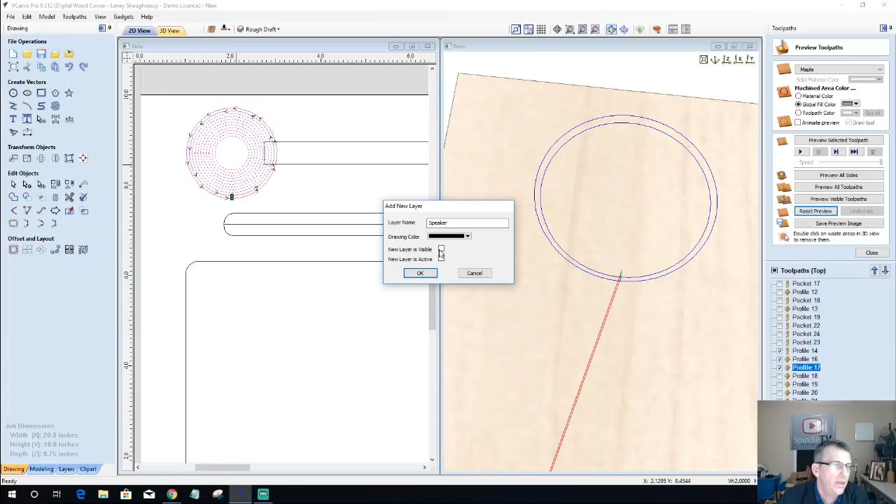So let me show you that. Let's go back to our layers here, and I'm going to put these vectors on a layer. Move to, I'll call this speaker, so I can hide it for a minute. Click OK, or hide it for a moment and then click OK. Let me leave it visible for a second because I want to copy and paste this one.

Alright, so if I turn my speaker off for a moment, turn my toolpaths off that you guys are seeing those lines. Move this guy over to the rough draft layer. All right, so ultimate goal is a nice smooth cone. I need 3, we'll go 3 lines in, so I'm going to offset this inward.

1/8, let's see here, my V-bit is 1/4 inch wide. So we're going to step over 1/8 of an inch. 0.125. 1, 2. We'll go with a third one there.

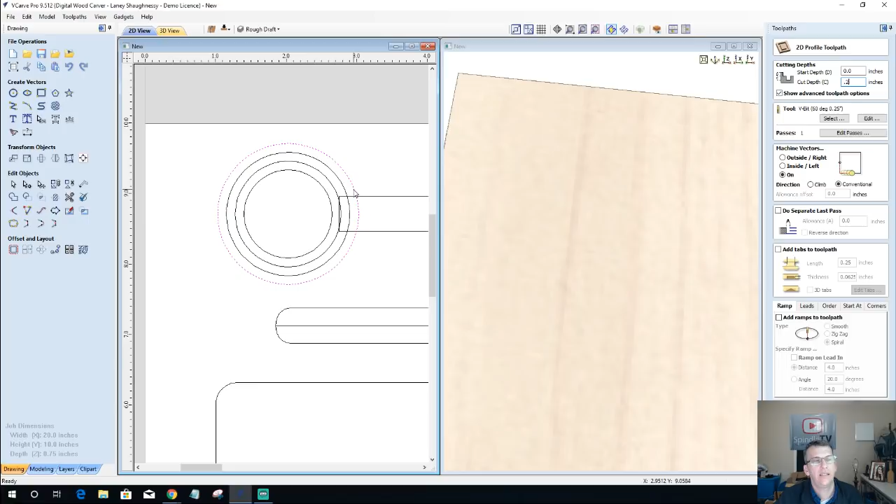All right, so if I were using this, it would be a profile cut with a cut depth of 0.2, 60-degree V-bit. I want that bit when it cuts, it's going to cut on the outside of the line. And one of the things that I have to be mindful of is I'm going to be cutting here, and this is half my bit, 1/8 of an inch step over, so I'm technically cutting on this line, and the edge of my bit will be cutting out here.

So with this line selected, we're going to be on the line. 0.2 depth of cut, 60-degree V-bit. We're going to calculate that. Preview that toolpath. Okay, that's going to give me my first cut. Now I'm going to jump over here.

Profile toolpath. 0.4. Oops, too many decimal points. 0.4 on the line. Calculate. Preview that second toolpath.

Now, don't you do that. Did I skip a line? Bear with me. Calculate. Let's reset that preview. I screwed up those two. 1, 2. Buckle my shoe.

Okay. Slight little step over that I need to clean up, so I'll probably do an offset allowance on that. But let's go ahead, my final cut is profile toolpath 0.2, 0.4, 0.6, 0.6. And I probably could go the full 0.625. We'll do that.

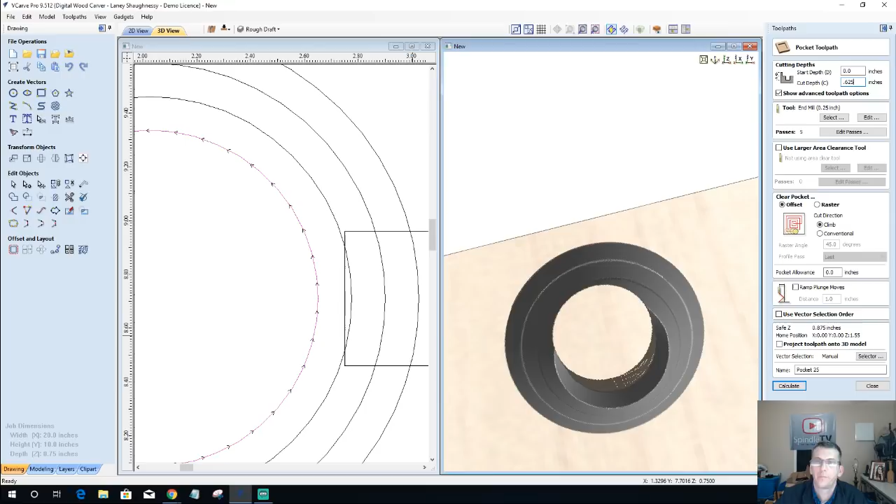All right, and with that same circle there, that's a pocket cut. I'll use a quarter, 0.625 depth of cut, quarter-inch end mill, calculate, preview that toolpath. Let me turn the color off for a moment.

All right. So, on our smooth cut, we've got just a slight offset here and here on these two cuts. So we could do one of two things. We could bring our lines in a little closer together, or we just do an allowance.

So if I come back to these three cuts here, if I do an allowance, it's not going to let me do an allowance while I'm on the line. It's not going to let me do an allowance while I'm on the line, so I've got to change up my vectors a minute. We're going to go here, and we're going to be inside and calculate.

Inside the line will allow me to take an offset. If my bit is a quarter-inch wide, that's the distance from here to here. My center line here should be right at that V at the depth of cut, so I should be able to grab this line here. If that's my V, and I go inside, I need this line - that's the center of my bit. Yeah, inside - sorry, I screwed myself up there for a minute.

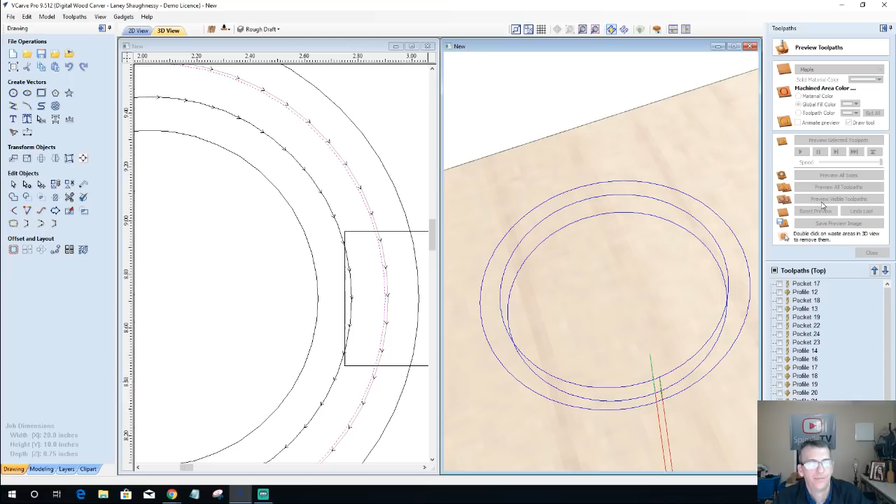Damn, did it again guys. Ah, right there, calculate. Reset. Preview visible toolpath, sorry guys, all this seriousness behind - there we go. And that allowance offset right here, I can now do an allowance offset. Let's do one more, let's jump down to number 30.

Inside the line here, calculate. Was the depth of cut 0.6? New, calculate, preview. Now let me get my center out of there, my pocket cut.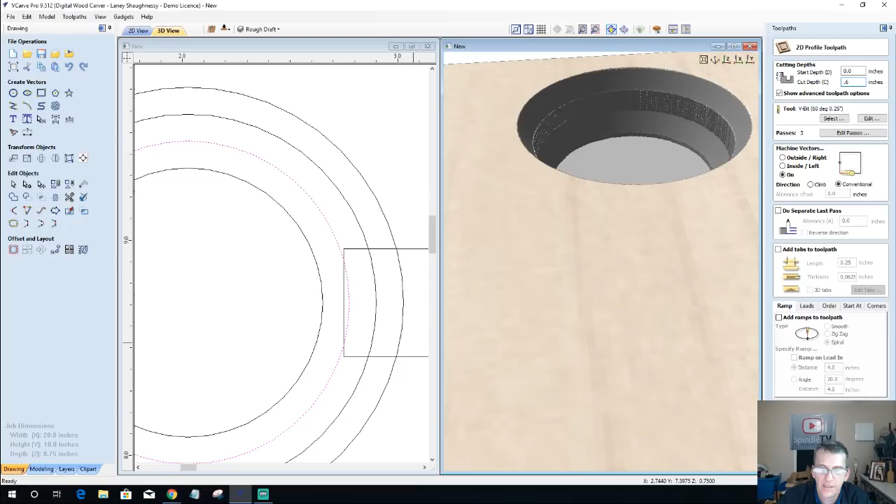Alright, point 2 depth of cut, 60 degree V-bit - this is much easier with a 90. 60 degree V-bit, we're going to allowance, offset, none on the first one. Wonderful, preview that toolpath - that's going to be that.

My second toolpath, number 29 - this is where that big old deep cut was. That's going to be 0.4, we're going to double that up. 0.4, and it's going to be on the inside of the line. I'm going to offset it a little bit in the negative direction - we're going to go 10 thousandths of an inch. Get rid of that extra decimal, and calculate. Preview the selected toolpath.

Okay, probably need to go a little more than 10 thousandths of an inch, so we're going to open that back up and we're going to go 0.02. There we go, all right.

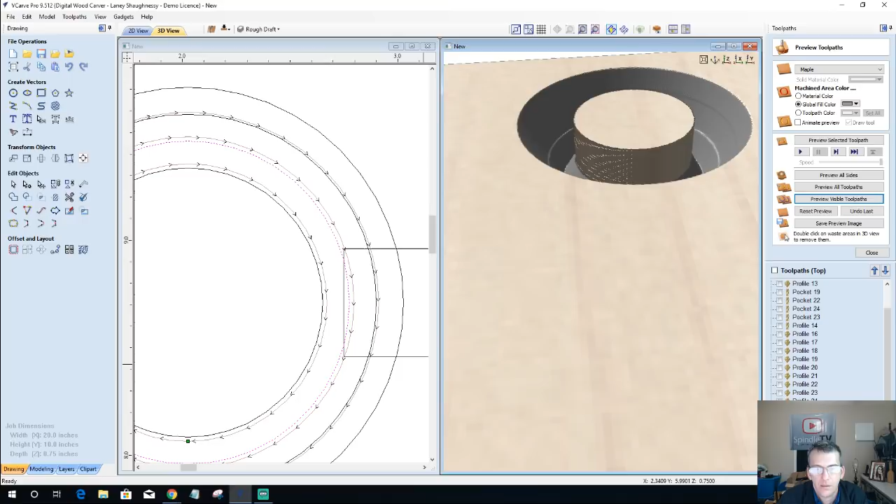And then, with that done, my pocket cut - let's actually take that, let's take that. This profile cut right here, number 31, and make this 0.625 go into our final depth. On the inside of the line, 60 degree V-bit, and that's going to be 1, 2, 3, this line here. Calculate - I didn't put in an offset allowance.

Damn it, negative numbers guys. Negative - oh, it is negative. What did I miss? What did I miss? Missed a line somewhere. Oh no, pocket cut - 0.625, that goes on this line right here.

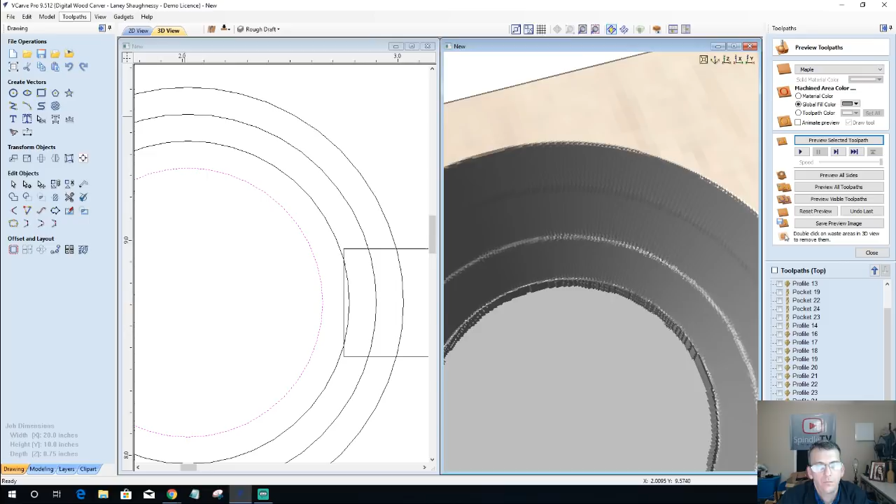Okay, now I'm going to turn my preview visit - now that I've got that laid out, I'm going to turn my quality simulation back up. And we're going to preview 1, 2, 3, 4 - 28, 29, 30, 31 in a pocket cut.

All right, so the offset allowance on this one here is just a little light - need to bring it out a little bit more so we get a nice smooth cone, and that would be the long and short of it, to create that smooth ramp and everything in. I don't like the way the bottom one looks here, and I don't like the way that one looks - it needs to be cleaned up. So that cut, let me just - I'm anal retentive.

1, 2, 3 - so that's the wrong toolpath. Offset allowance, 0.03. Calculate. Preview. There we go.

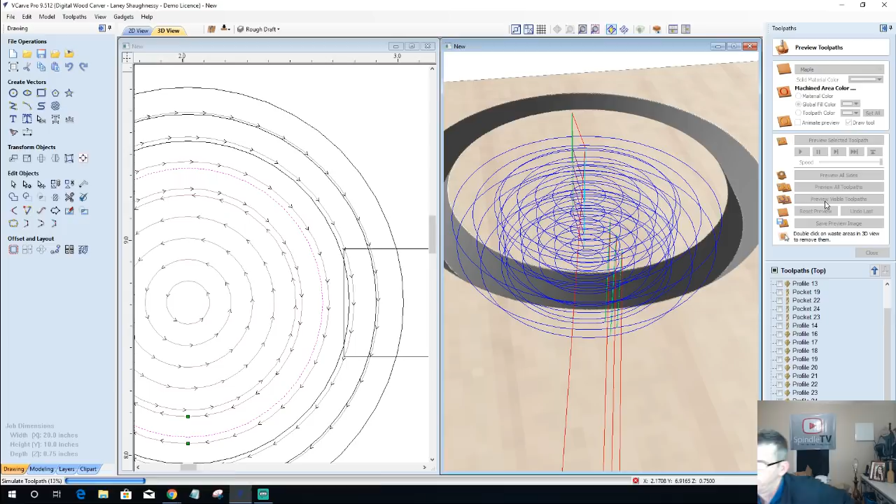0.03125. Let's recalculate that, and then we're gonna move on. We can't be stuck on this to get smooth walls when I don't want smooth walls. So long story short, you want to take and... okay, so a 32nd on that pocket cut isn't enough, but a 1/16 is too much.

Oh, I didn't do any allowance. 0.0, negative 0.03125. Calculate. Preview. Oh, still overshot it. So it's probably like a 0.02 or something. But anyway, you get the idea.

Now, the whole purpose of that is if you wanted to have that smooth cone, you could. But what you have to do is look at your depth of cut represented by this rectangle, the angle of your V-bit represented by this line. This is a 60-degree angle. And then you have to determine how many steps you need to take to make that bit reach that depth, to cut that line and everything. How many profile cuts you need.

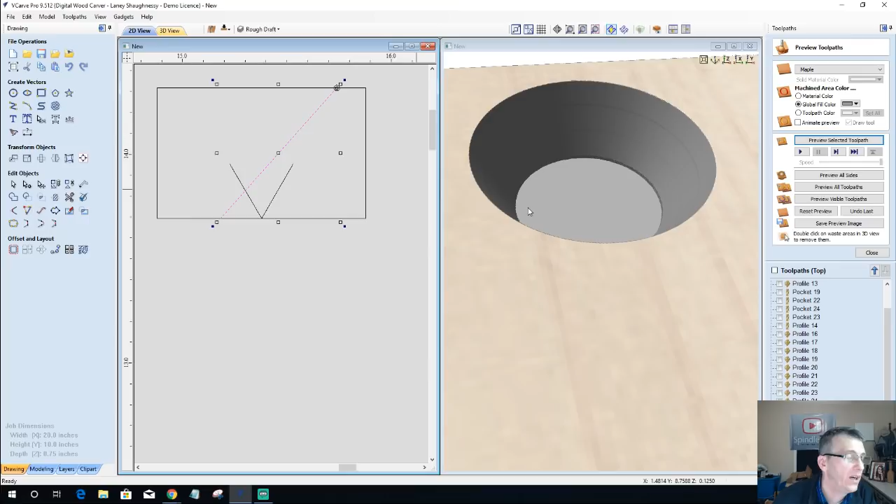If I were using a 90-degree V-bit, then my slope would be much grander. If I was doing 90, that would be a 45-degree cut, of course, but my slope would be much grander, meaning my speaker would be more open. And it may require a 90-degree bit versus a 60. I don't want that kind of a wide angle, but that would give me a smaller diaphragm area, that center hole, if I had a wider angle slope coming into it. But for now,

I want the ridges. I want that speaker effect. So let's go into our pocket cuts. Let's get all of these turned back on. Preview.

It's moving along. All right. So far, hopefully that last part didn't confuse you.

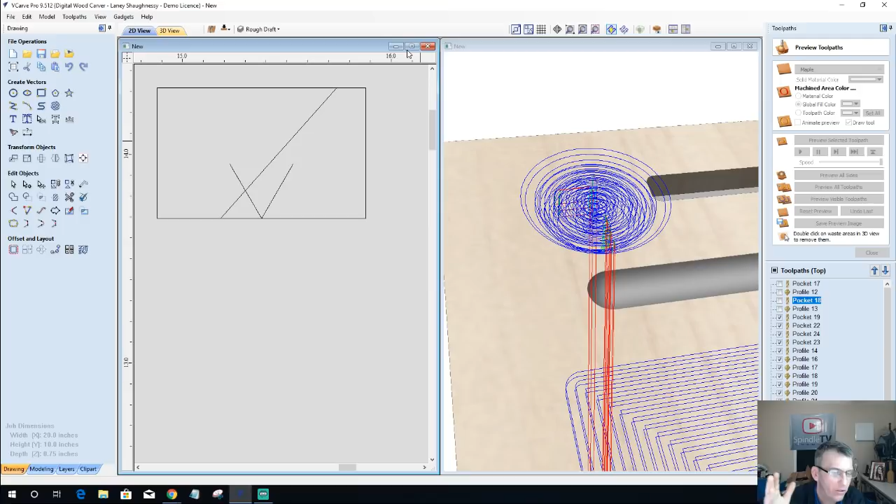We just, in order to get a smooth transition, if you're trying to get any kind of sloped or angled cut, let's say you're making one of those decorative wine bottle balancers or something, and you got to put a miter at the end of your board, and you want to use your CNC versus your table saw or bandsaw, and you want to put a miter cut on there, then it's going to be a 90-degree V-bit, that 45-degree half angle.

Whatever your depth of cut is, you need to figure out what's the maximum depth of cut on that bit, the cutter, the angled part, before it starts to straighten up at the top of the bit, the major part of the head. And you also need to know the diameter, the cutting diameter, and that'll tell you how far to step over your lines. It'll tell you how deep you need to cut and everything, and you're able to cut that angled cut and all. So keep that in mind.

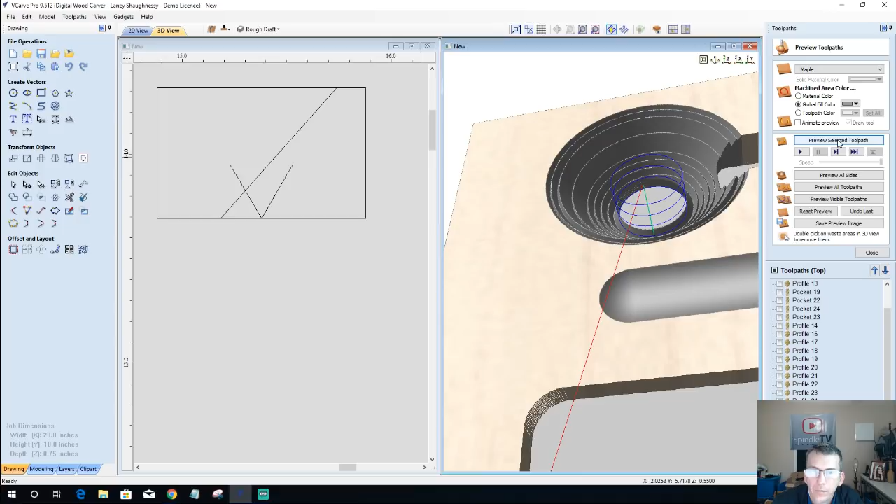Now I've got one more that I've got to mill away here. I got to find out where that homeboy went to. Where'd he go to? That's that one. And I think number 27 is also me. Yeah. There we go. All right.

Now, with this only being a 3/4 inch board, that is a pretty shallow speaker hole. How well will it amplify the sound? I don't know. It's all going to be in the test. Does this board have to be double its thickness? Does that cone have to be deeper? I wouldn't think that it would need to be deeper because your ear canal and all that wonderful jazz and more and all that stuff. But you kind of get it. So

This would be my laptop station or my desktop kind of accessory little tray. Let me see what this little...

Oh, that's just a little scrap piece of wood. Okay.

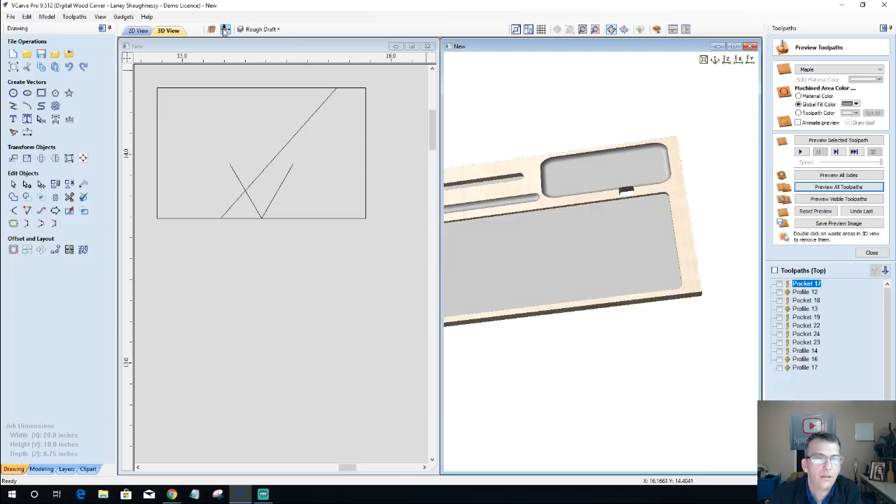This would be my accessory tray. It would be a two-sided job, with something on the back side. I'd probably end up putting feet on this and creating the angle itself, plus my little cable groove in there. Let me turn my visibility of both sides back on. There we go. So that would be the finished tray.

Let's maximize my screen here so you guys can see what I'm doing. So: cell phone, built-in amplitude speaker, and passive speaker. From there, that would be version 1.

If I turn off my cable track and stuff, my original concept with a smaller board, I'm going to end up taking that design and carving it on a thicker, smaller board, a little bit deeper cut, and seeing how the sound works on that. Then we'll end up modifying this.

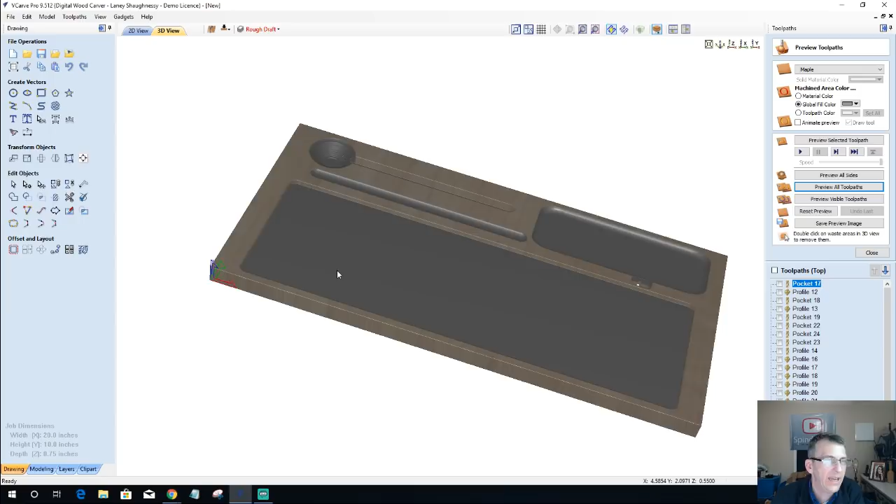This will lead into, depending on the sound quality and everything, different accessories for the office or home—cell phone stations, docking stations, change caddies, wallet caddies, and things like that. It can be customized with carvings, names, and company logos, and the possibilities are endless. This is where you use your imagination and build it up from there.

And in all, the main concept of this—getting it to be a workable concept, as a starting point—is going to be the passive speaker. That's going to be the main selling feature, or the feature of this.

I mean, why else would I want this keyboard station, other than to be able to rock out some music and have it amplified on my phone while I'm working on my PowerPoint presentation, or whatever the case may be.

Now, think about it. When you're at your computer, I could have a tab open with Spotify playing while I'm working. I don't necessarily need my cell phone, but if I'm working hands-free without an earpiece or Bluetooth, and someone's talking to me on speakerphone, their voice will be amplified to me, and the phone's microphone will pick up my voice well when I'm on speaker. And then, of course, smaller docking stations and things like that. So the possibilities lead into so many other things—it's just about getting the concept.

Now, for me, I think out of a 1-inch piece of material, giving a little bit more depth in the speaker would be fine. I won't know until I actually carve this evening and make one, and then come back in and perfect the design. Once I have the design tested and working,

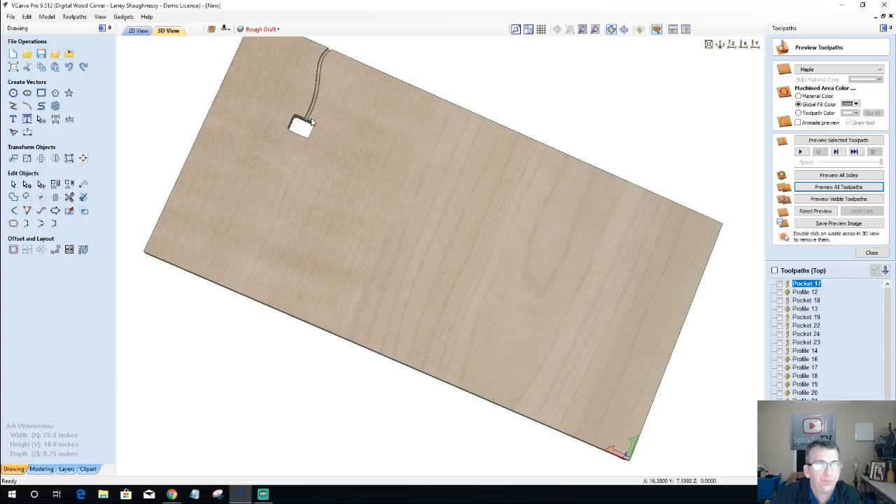Going back to Bob's idea about a box core bit for that slot - you had a great idea about a single line for the slot on the back side of the cable, for the cable slot. I wouldn't use a box core bit for this one, because I want that cable to kind of press fit in there, and I'd change my vector to whatever size it needed to be. I want it to press fit, not loose, and come out at the top. So if I had to lift that tray up looking for a piece of paper on my desk, I want my cable to go with it. I'm hoping the cable will snap into this groove type of deal on the back side.

Guys, this is a very simple, basic project. There's nothing complicated about it. I want to challenge you with our projects, but I wanted to make this simple concept piece because I actually want to make one for myself, and this will lead into other things I can carve and make for others to sell or what have you. I want to make one, test it out, see what it needs, what's missing, what can be changed. So it's just a way to start.

Peter Hearn asks: when doing large areas of area to clean out, should I just use an end mill, then finish with a ball nose to get a clean look?

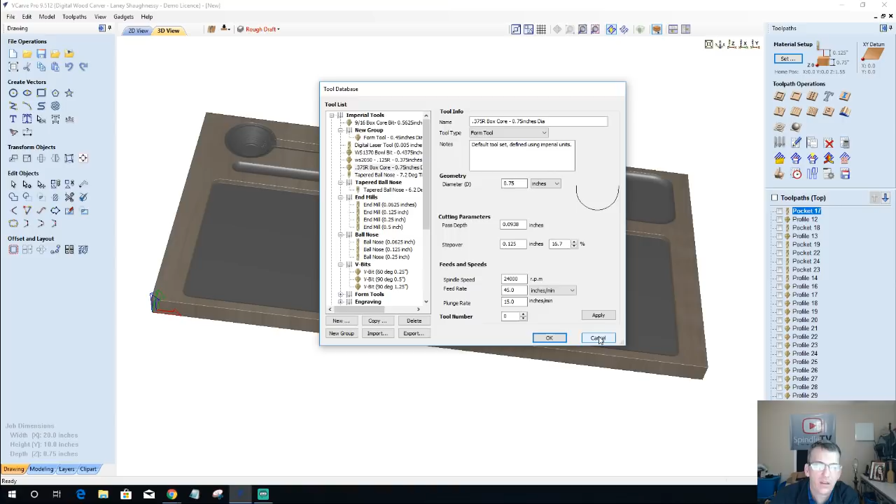Your box core bit could of course pocket everything out, Peter. However, with that radius of that bit - let's go to my tool database here - only the bottom part of that bit is cutting and clearing that flat bottom pocket. Depending on the radius of the bit, if it's a large pocket area, this would not be the optimized tool to pocket with. I would pocket with an upcut spiral, a quarter inch, half inch, whatever it may be, and then I'd do a finish cut, a profile cut around the edges with my V bit or box core bit or bowl bit, if I was doing a chip and dip bowl tray, to finish up that edge. But I wouldn't use the whole box core bit to pocket the whole thing out, because it's only a small amount of the tip of that bit that's going to be flattening the surface, and I'll end up with witness marks where the tool is - it's not the proper tool for that. Use an end mill first to do all your clearing, then your edge profile with your profile bit.

Any other questions, guys? Now's the time. And it doesn't have to be on this project, it can be on anything. If you have any questions about anything, let me know - now's the time, this is our Q&A moment.

By a show of hands, before we say goodbye, in the chat area, if you're still with me, chime in. A project like this, or taking a concept like this - if it works and the speaker works well - modifying it, sizing it, doing different things with it, like a charging station where we could cut pockets and slots for some USB ports, whatever the case may be. Even in its basic design, how many would make something like this, or make something for themselves or others, gifts, selling it, or what have you? Show of hands, yes or no - yes being I would, or no, it's not something that interests me.

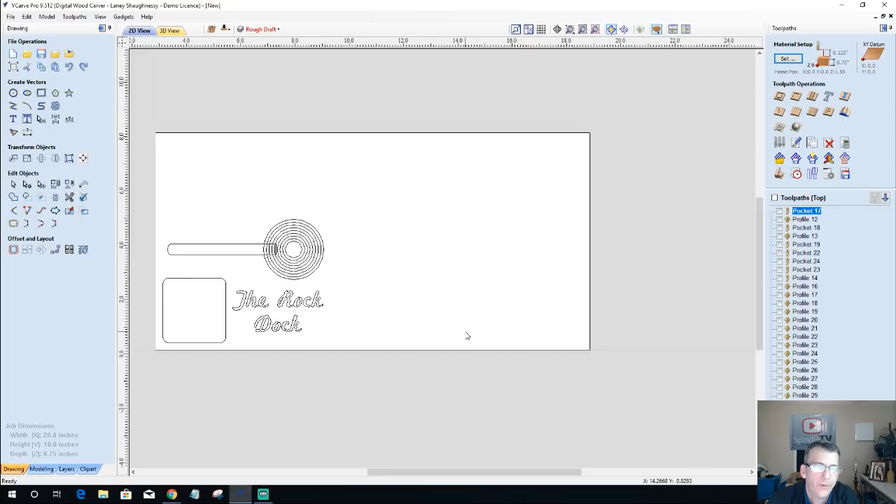Up in this pocket area here, or somewhere in the opening, if it was somebody else, it could be customized with a company logo, customer's name, whatever the case would be. Of course, this could be sized. This is one accessory of many — a smaller nightstand docking station or something, customized with a name, like the little rock dock type deal, on a smaller project. Just a wallet caddy, or an earring and bracelet catcher, with a cell phone charging station, all that kind of stuff. The possibilities are pretty phenomenal — there's a lot of little things that certain things can be incorporated into.

All right, cool. We're getting some yeses. Awesome. Yep, there you go, Chuck — a little bit bigger, add a pinhole for sure. Yep.

There's all kinds of different ways to make a passive speaker. If you're ever curious, Google cell phone speaker amplifier, or cell phone/mobile phone passive speaker, and look at all the different things out there. Some of them look like bullhorns. Some have similar holes and cutouts like this, with that angle cone. Some are enclosed completely to create like a little stair system. There's so many different choices.